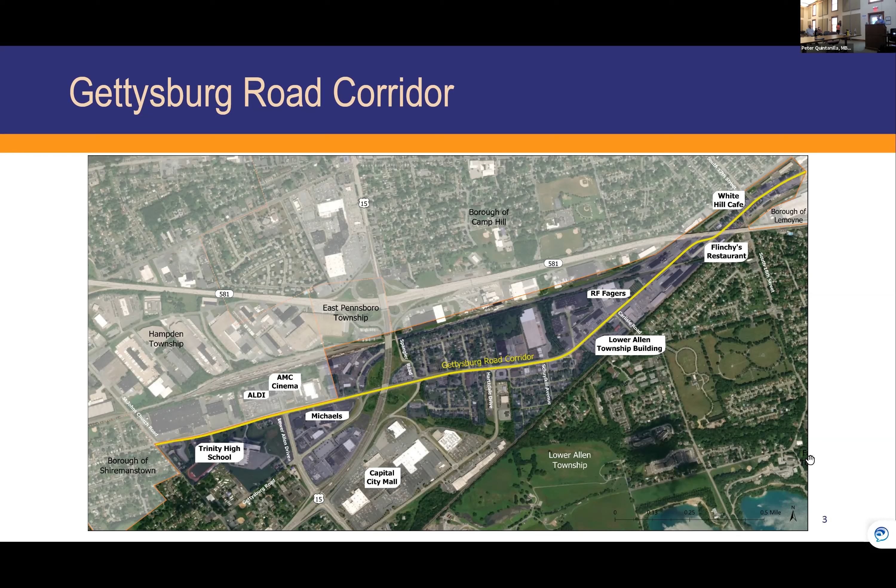This area is not just surrounded by or terminates with Shiremanstown and Borough of Lemoyne. It also touches upon Borough of Camp Hill, East Pennsboro Township, and Hampden Township. We've communicated with those municipalities and made them aware of this project. If there's any coordination opportunities, Shiremanstown Borough is definitely interested, possibly Lemoyne Borough, and Hampden Township sees some potential opportunities. So we're also trying to think about the bigger picture with this project.

So again, that corridor is about 2.5 miles. It is a state-owned roadway, so PennDOT has been involved from District 8. Michelle Tarquino, the district planner, is probably going to participate tomorrow since she's signed up, so we'll have their direct input and involvement.

Starting with Simpson Ferry Road on the west - those are the actual road names you might be more familiar with. But for this study, we're calling it the Gettysburg Road corridor. Simpson Ferry, Gettysburg Road, State Road, and Hummel Avenue comprise the entire corridor length, and you can see the specific state routes identified by PennDOT.

So again, 2018 was the right date for the comp plan. It recognized an opportunity to support redevelopment along the corridor. Some of the objectives are to breathe new life into underutilized properties, unify land uses, and create a welcoming gateway into the township.

Multimodal transportation access is also something we're focused on with respect to the corridor - CAT, Capital Area Transit, serves this corridor. Through our work, we also recognize it's a heavily used bicycle route because it's a designated state bicycle route, which we'll show here.

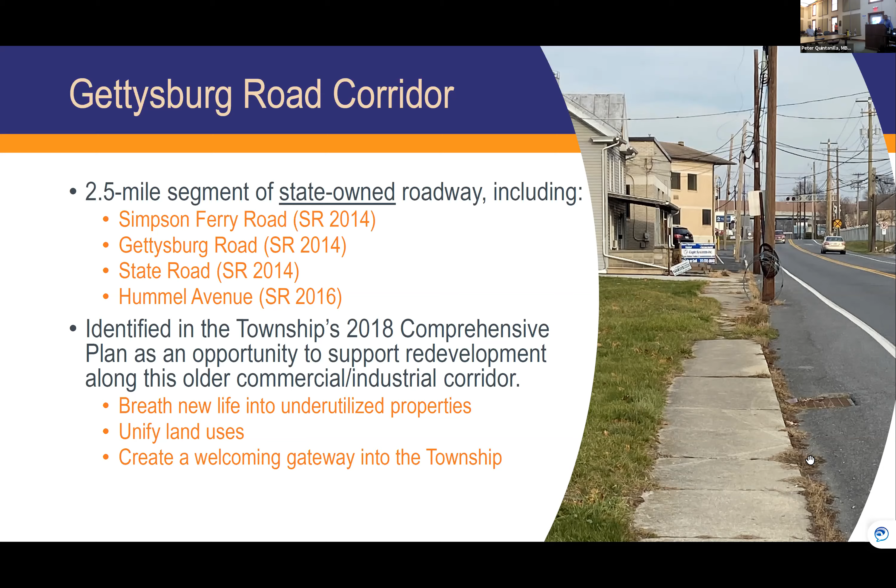The existing uses along the corridor - many of you know it quite well. There's a combination of active industrial uses; in fact, the short line railroad crosses here from the Norfolk Southern line to access some of the industrial properties still in use. There's also commercial, retail, and residential uses throughout the corridor.

Some of these uses and places are seeing opportunity for improvement, new sidewalks, et cetera. So that's some of the things we're going to talk about.

We also know this segment in the top picture is close to 17th Street, on the Lemoyne side. As you go under the 581 overpass, you'll approach the Carlisle Road intersection just outside the township building, and that's where the 2 lanes automatically turn into 4 lanes.

So we have this combination of traffic that's well metered, meaning consistent, slower speeds, but as soon as they get to the 4 lanes, it opens up and speed limits aren't abided by as they are on this end. So you have more traffic trying to flow faster, et cetera.

We also know, as seen in the bottom bullet point, that with the interchange relocation and reconstruction, traffic volumes have declined. In 2008, average daily traffic volumes were around 24,000, and by 2012 that dropped to 17,000. It's important to note that the Federal Highway Administration acknowledges that whenever traffic volumes drop below 20,000, that's a perfect opportunity to think about some type of complete streets or road diet to integrate other modal uses like pedestrian and bicycle into that network.

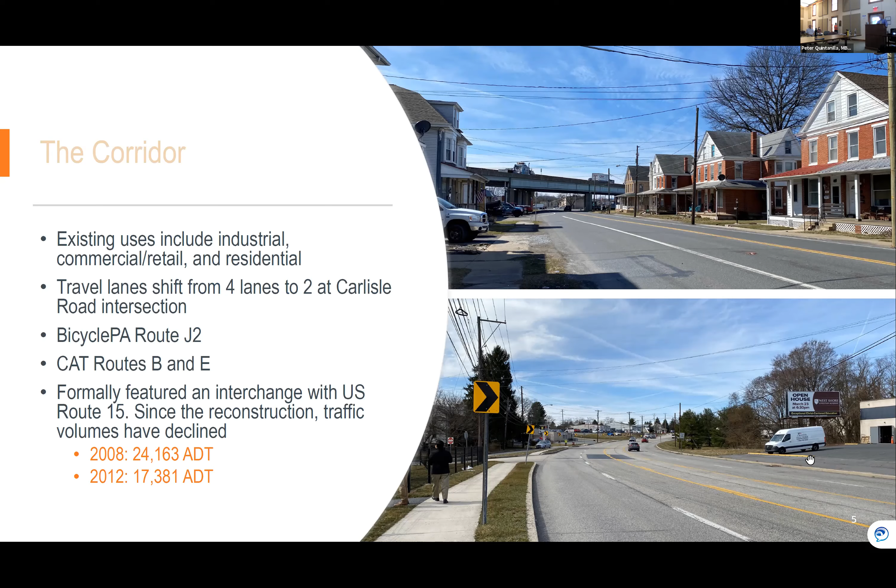Also, two CAT routes, B and E, also service the corridor as well.

So from a zoning standpoint, this is the industrial zone properties, and finally the orange is the general commercial zone. That's the current zoning. We know from township staff there are opportunities for improvement in how those zoning districts work and some of the regulations and standards that need to be looked at. That'll be helpful to think about through this process to get your ideas on future land use — what do you want to see for that corridor in the next 10, 20 years?

From a land use perspective, but also a transportation perspective, we know the township is investing in the former Bonton property, so there are good reinvestment opportunities nearby, but specifically along the corridor we want to start thinking about some of those opportunities as well.

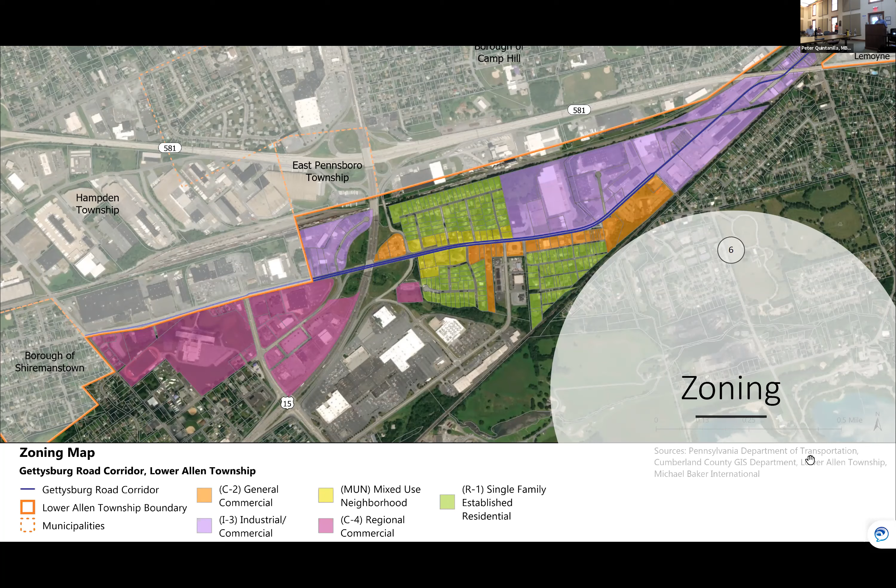In terms of bicycle connectivity and walkability, we mentioned the corridor is designated bicycle PA Route J2. The yellow areas on the screen are within the corridor — those are the actual sidewalks, showing where sidewalks exist. You can see there's a lot of disconnectivity within that sidewalk network, and very limited sidewalk connectivity along the corridor itself.

There's a little bit of sidewalk next to the town, just outside the township building. I think the township put some of that sidewalk network in to facilitate access from the township building and the park further down, and I think that was also to accommodate when Walmart went in. Is that right, Aaron? So there was some logic to trying to make those connections to some of those new shopping opportunities.

So that's what we want to think about too — multimodal connections. There's really no bike amenities outside of wide shoulders. At the 4-lane section, there are some pretty decent shoulder opportunities for bicycle lanes possibly. So we should think about where bicycle lanes could go, and also whether there's enough capacity in the roadway network, or over-capacity meaning extra lanes, and whether there's an opportunity for a dedicated lane for bicycle or pedestrian routes.

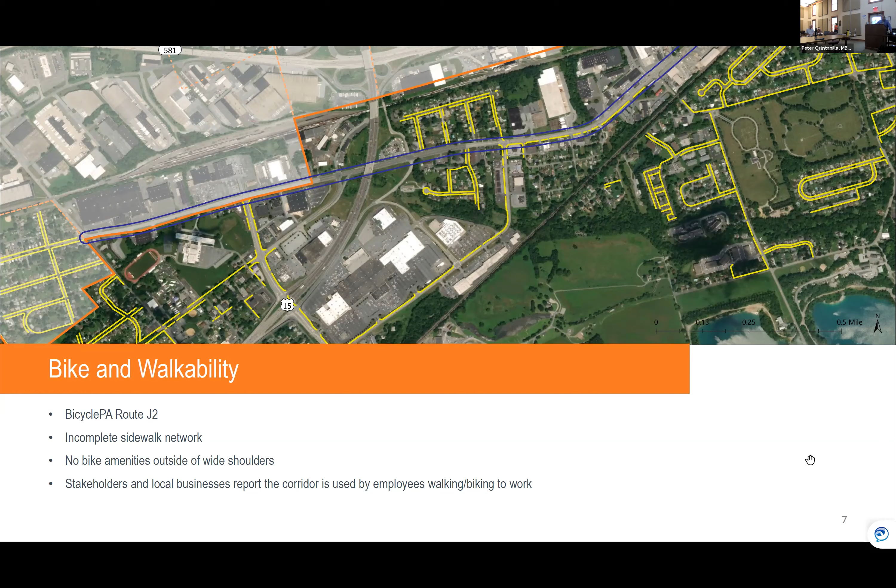I think here in the West Shore, there's a project where Market Street comes into Lemoyne. They're also considering moving forward with a dedicated lane for bicycle travel. That's a pretty tight bottleneck coming across the river bridge from Harrisburg into Lemoyne, through what they call the bottleneck. So if they can do it there, there might be precedents locally within PennDOT District 8 that we could apply to a possibility of looking at it in this corridor. So again, just throwing out ideas to get the juices flowing and get your feedback on what we're trying to achieve over the next day and a half.

So some of the safety issues that we've identified too in terms of crash statistics, in total, this data has been evaluated from the period of 2015 through 2019. This is after the interchange has been relocated to the Lower Allen Drive interchange. There's a total of 117 crashes, 1 fatal crash, 3 suspected serious crashes, and 4 pedestrian crashes. So there are conflicts.

This data for this type of state road with volume is typical, so it's not out of the ordinary. But anytime you have a fatal or any type of pedestrian involved crashes, we know there's a safety issue that we need to be concerned about. Where you see the red circles, or what we call the heat areas, the hot areas.

Yeah, so 2015 - if you remember the previous slide, I think it was around 2010, 2011 when the interchange was relocated. The previous slide about traffic volumes had data points of 2008 and 2012, and we saw a decrease that was directly attributed to the interchange being relocated. So what we're showing here is definitely after the interchange was relocated.

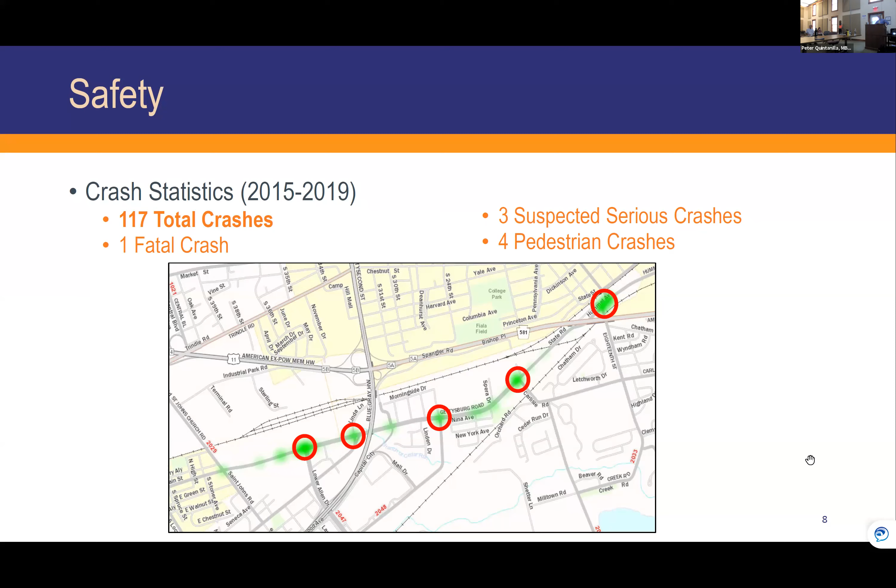So you can see where the main issues are, as you would think, at the intersection points. If you go back to the land use, at Hartsdale we have residential areas too, so thinking about pedestrian movements, if people need to access those. We have the background data on all of this, but just wanted to give you a summary of what's happening - that's what we wanted to present.

So we also had one-on-one interviews with property and business owners along the corridor. We conducted those interviews back in the April timeframe, I think, Aaron. I'm losing track of time here. And then we just recently had a public survey that I believe is still out through this urban design workshop period, but already we have 670 responses. That number actually rivals the amount of responses we got for the whole township's comprehensive plan, which I think was around 700, Aaron, at the time.

That's a really good response. I mean, that is a phenomenal response to think about, just for this segment of the township. So that's impressive, and it's given us some really good feedback too.

And again, where we're at today, this is all part of the public input process to help inform what you, as residents and constituents, want to see this corridor be in the future. Let's just say a 10 or 20 year horizon, because some of the projects might be more capital intensive, et cetera, to make those changes and transformations. Plus if there's any additional land use changes, that probably would take some time too. But again, what we're trying to think about is how the township, how the corridor looks today, and what the community would like to see the corridor look like and operate in the future.

So I just wanted to share some of the survey findings. Of those 670 responses, 72% are township residents, which is great. It tells us that these responses are largely coming from residents, but it's also important that the balance is telling us that they work in the corridor. So you've got people that not just live here, they actually use and navigate the corridor.

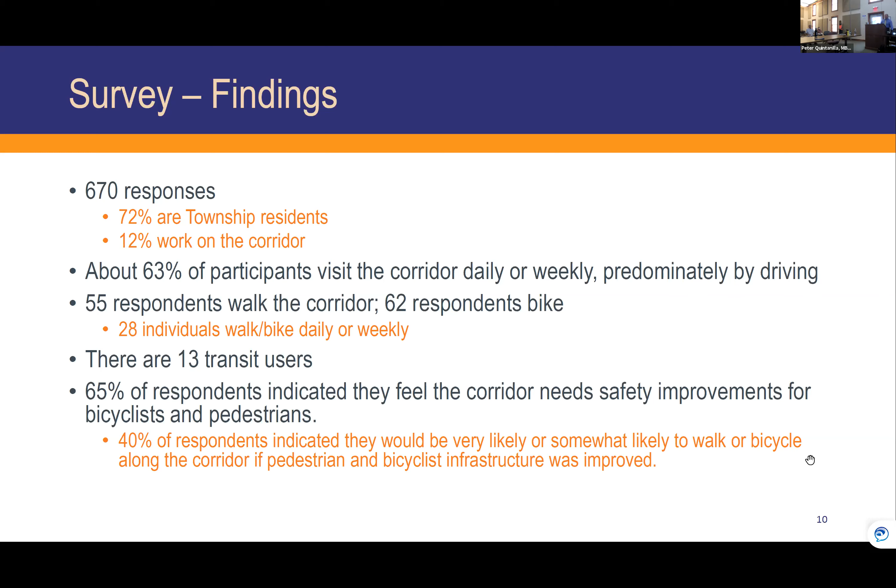Those improvements focused on bicycle and pedestrian safety. And if those improvements would be made, there's an indication respondents said they would be very likely or somewhat likely to walk or bike the corridor in the future. So think about the concerns regarding the current corridor state of high traffic volumes, speed, and safety issues that could be improved upon.

Generally, participants support aesthetic improvements, the overall appearance, new uses to include restaurants, parks and recreation, retail included, improvements to include sidewalks, crosswalks, bike lanes, and lighting. What participants in general do not support is new industrial, office, or healthcare uses. Also, they don't support new residential uses.

Yeah, John, I think you're talking about healthcare. Is that the one? Or I just thought, if you don't support residential, industrial, commercial, what uses do you support?

That'll be helpful to start when we begin envisioning the corridor. It's our response to, okay, let's think about this in a bigger picture. New residential uses, removing traffic lanes or blinking lights. I think what we're getting at is that they possibly see the corridor as being developed today, that the development is contributing to what we see in terms of aesthetics and to the safety issues.

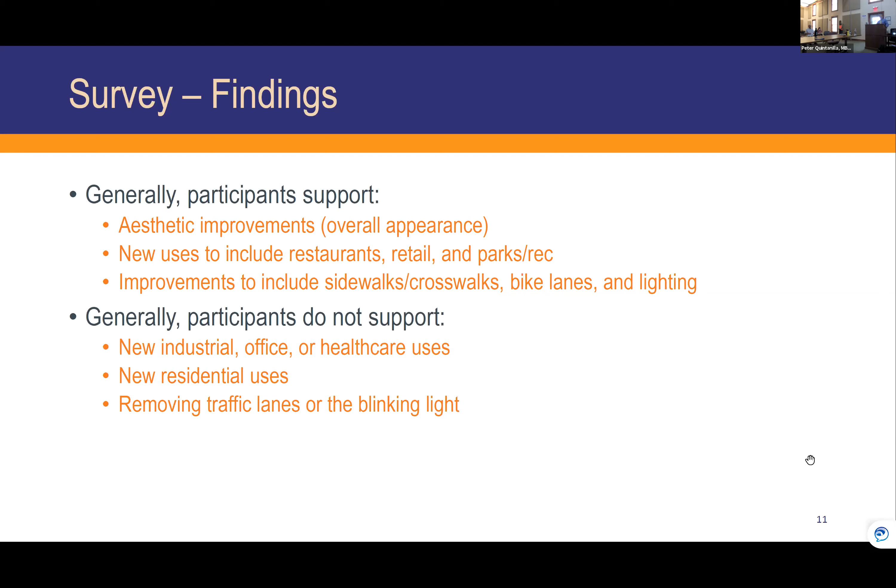There's probably a play there, in terms of if you have more development coming in, it might maybe potentially exacerbate any issues that are currently there. So again, how you interpret that information is obviously key. But that's why we wanted to do these urban design workshops, to start to have more groupthink and also physical drawing that Peter and Kirsten will start to do a little bit this afternoon, but also especially tomorrow.

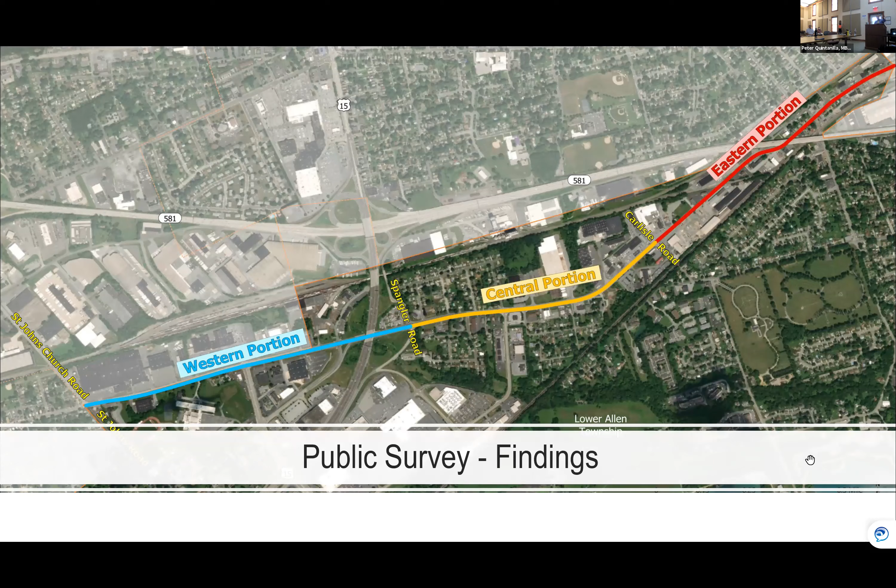So the next couple of slides get a little bit more into the details of the survey. We tried to help the survey respondents envision the corridor in sections: the western portion, central portion, and eastern portion. I think you can see how we segmented those out, and that's how the responses came back in. I'll just walk through these in a more expedient fashion.

Very interested or somewhat interested respondents in terms of restaurants, retail, parks and rec, future service businesses are generally supported. So think about any shops, offices, etc., that might be more business service related, shopping related, might be supported, restaurant related. You can see the eastern portion of the corridor had a lower level of consensus. Think about the corridor from left to right, going from Shiremanstown to Lemoyne, traveling through the township as you read those responses: western, central, and eastern.

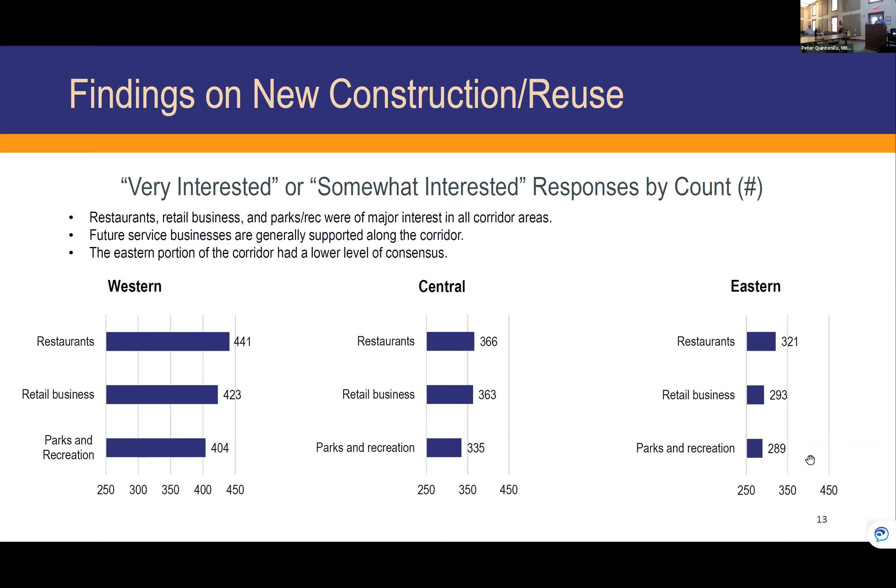Transportation improvements that would be helpful, very helpful or somewhat helpful. So these discuss street lighting, sidewalks and crosswalks, lighting under the bridge itself, bike lane there in the central, eastern...

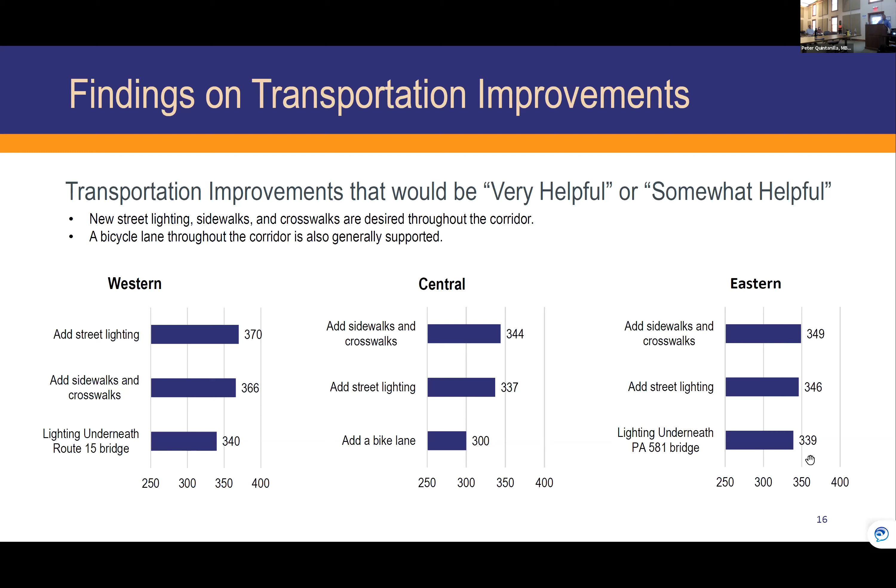Also on that side too is the 581 bridge. So again, those areas of trying to think about navigating that at night, you think about some of your users of bicycles, but they're going to different shifts during the wintertime when it's darker longer. They might have to get to work and they just really don't have good visibility along that corridor, or if somebody's walking that corridor, they don't have good visibility, and a perception of maybe safety might be driving some of the lighting issues there too.

Transportation improvements considered not helpful. Just in summary, hesitation to reduce the number of travel lanes. I think there's not a real consensus on how reducing the 4-lane section down to maybe 3 lanes, whatever that number might be, from a road diet. I think we need to talk through that.

I think what we're hopeful is through this process, we can start to get a visual perspective. And whatever we come out of this with in terms of transportation recommendations, we have traffic engineers that work with District 8 on a regular basis, PennDOT District 8. We always take these ideas back and test them with our engineers to make sure there's some feasibility in terms of meeting design standards, that this is feasible from that design perspective.

And obviously cost is another perspective. We really try to ground truth these ideas and get experts in from a bicycle perspective, if we have bicycle improvements, to make sure that what we're recommending on the back end of this project actually has some level of feasibility that the township should be confident to start to move forward.

There is a response to maintain the existing blinking emergency traffic signal. They don't want it removed out here at the township building. But even trying to ingress and exit is a little bit of a challenge because of the 4 lanes. I experienced that, especially because I live in South Middleton Township. I want to turn left, I want to get home that way. So that's a little bit challenging.

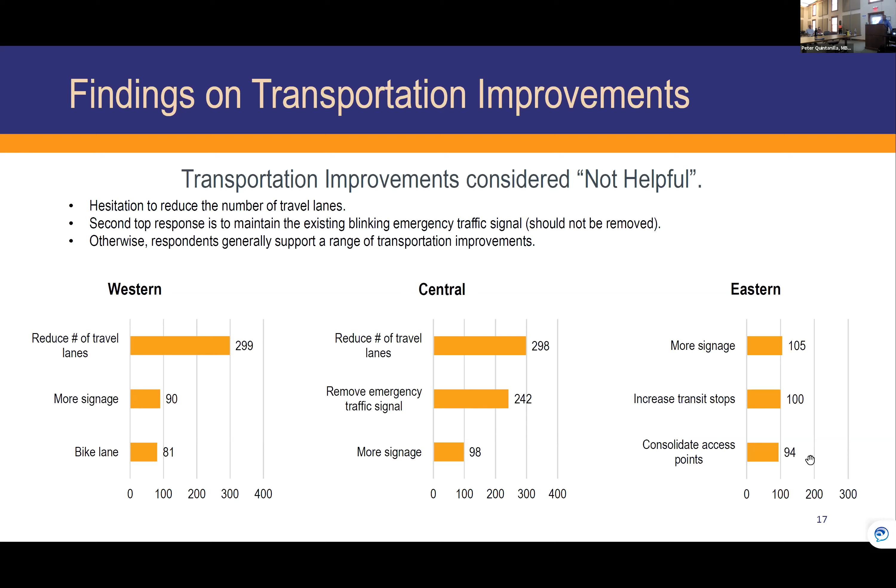So just to wrap up here, I'm going to turn it to Peter and Kirsten, because Peter's going to be out going live from the field, much to Aaron's concern that he might be a safety hazard, but we trust he'll be fine.

And then we regularly hold meetings with township staff on a monthly basis. And then we'll be having more public meetings to unveil the final draft product with the Planning Commission and the Board of Commissioners here, probably in the July, August timeframe scheduled.

So the public will have a chance to see the whole document. It'll be out on the website, and kind of get all the inputs brought into it. So one last thing, just to kind of...

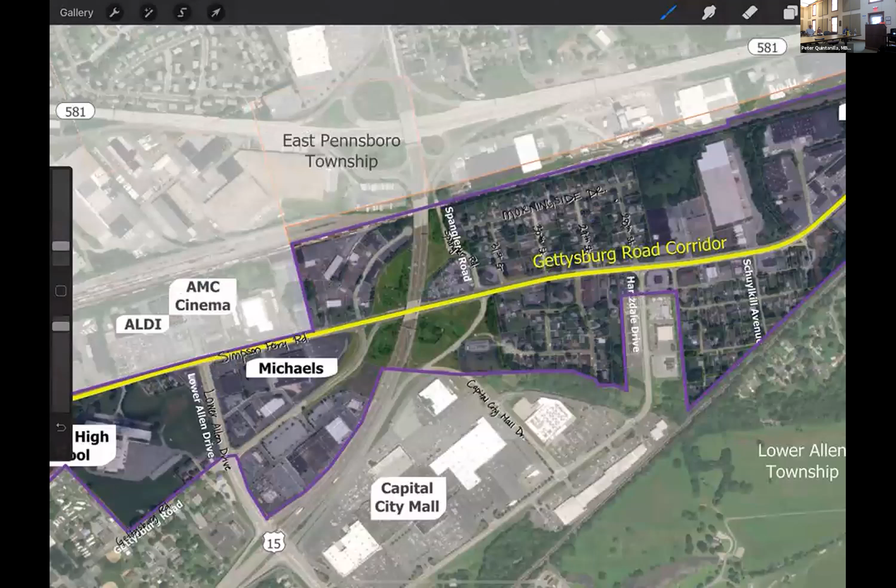So again, Peter was down here by the overpass, and we looked around at what those conditions are like underneath. Obviously you can see a large area like this looking at the map, but we're not looking at it in an enormous amount of detail, which is why we wanted to dive in and look in 3D. So we looked at some photos here, for example that underpass. We were thinking about the lighting, the connectivity, the sidewalk and the bike lane, and the opportunities with the green space on the side and the width of the road.

We want to open it up again to those in the room and those on Zoom, please feel free to be conversational, speak up and share your ideas. What did you guys think looking at this space? Is this a space that you would feel comfortable walking in?

I had not thought about the uplighting, in fact how dark that space actually is. So I would think uplighting of the overpass seems like a really good idea, to make that more lighting for bicycle or walk.

It's interesting, on the other side of the street you have a bicyclist heading west along the shoulder. Over on the other side of the street, if you're traveling east to west to get through that overpass, it's really tricky because there's kind of an entrance ramp, which is always difficult if you're on a bike or walking — a tough thing to navigate. So it would kind of make sense to see a bicyclist on the other side of the street, although that's not the ideal side.

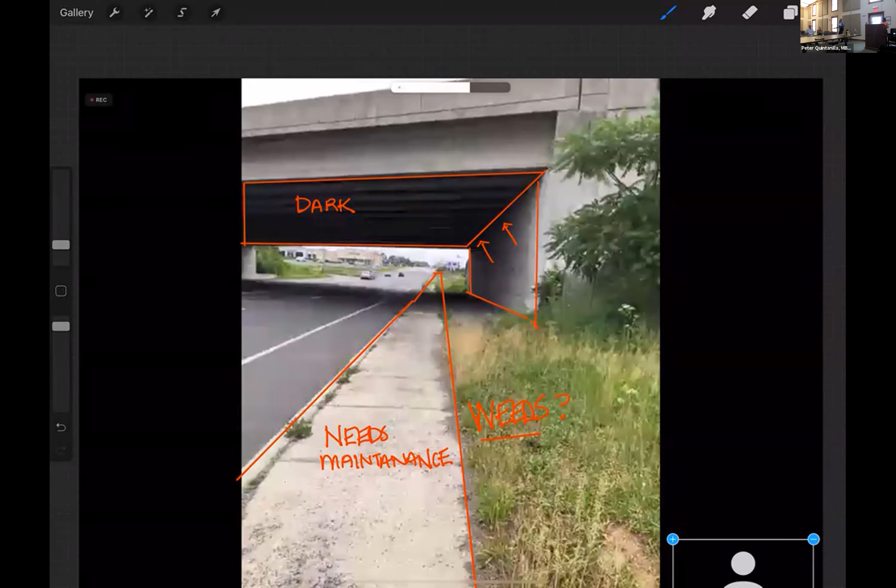Let's say that there was more lighting. Does the sidewalk itself feel safe next to the volume and the speed of the traffic next to it, on the other side? Despite the fact that there's no sidewalk on the other side? Yes.

So that tells you something. That tells you that people would prefer to be further away from the cars, even if there's not a formal sidewalk. If they can walk further away from the vehicles, that's probably why they're walking over there.

Residential areas on this side of Route 15—I more often see people walking Hartzdale Drive to get to Walmart, Capital City Mall, and other destinations than I see walking. I don't see a lot of people walking along Gettysburg, Simpson Ferry.

So they're taking the Hartzdale Drive route to get to the mall and those amenities versus here, because we have Spring Lake on both sides of the railroad, and Linden Gardens and Preston Manor, the developments between here and Route 15. They tend to gravitate up to Hartzdale Drive and follow it, from what I've observed, rather than going straight through into Hampden Township near Trinity High School. There are some destinations there, but I think most are more along Hartzdale.

So we have to think about that end of the corridor. If you would make land use improvements, then what would be the gravitational pull for? I see more bicycles here than I see on Hartzdale, and we just physically saw that today, right?

Do we think there would be a use for bicycles on both sides of the road, but with directions of bicycles that go with the flow of traffic? So bicycles going one direction on one side of the road and the other direction on the other side, or having a separated, more protected multi-use path?

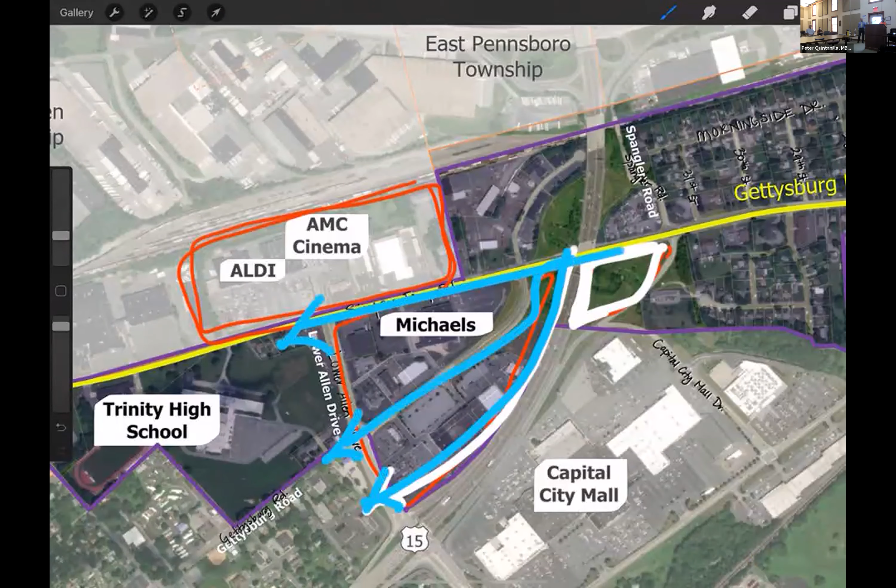So, we do just know that—go ahead, Peter. No, I was just gonna say I'm at the next place, so we could jump on whenever you guys are ready, but go ahead.

Yeah, we're just getting ready for you, Peter. We're just wrapping up here, looking at this—again, we're going to get into more detail starting to design these areas tomorrow, but we want to have this ground reference in our minds so we can jump right into it in the morning.

Hi, this is Commissioner Kutz, if I may make a comment. Yes, go ahead, Commissioner. So I think, in my mind, we have the big development authority project coming up that we hope will attract a lot of people from the mall, maybe foot traffic with the restaurants and whatnot, from the high school and the surrounding residential.

So you had asked what we think we'd like to see there. I think it's exactly that: pedestrian access and sidewalks so that we can have a commercial center for the township. We even have our police department designated as a separate zone—the Hartzdale Capital City Mall corridor—because it is the central commercial corridor of the township.

So I think part of what can help us make that area more attractive and improve people going to those businesses is improving the walkability of it, so that someone could park at Michael's and walk across to the specialty grocer and other tenants there, but could also walk down to Nikolai's or Pizza Grill for lunch, or walk across the mall. I would love for just the walkability aspect of it. Looking at the pictures Peter had taken, I don't think that area is utilized much by pedestrians right now, but I think it's because that sidewalk is not in the best shape and doesn't really go anywhere right now.

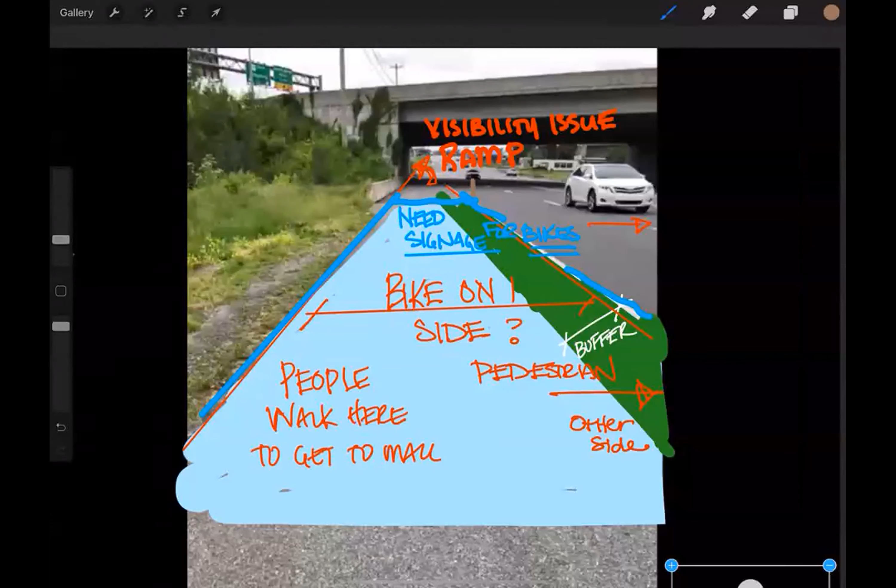And would poles like that be the separation that you're thinking about that would make you feel a little safer riding on a bike path there? Yeah, I think that's a great idea because it seems fairly simple and fairly reasonable financially. I like that - a bunch of poles really demarcating the area would be great.

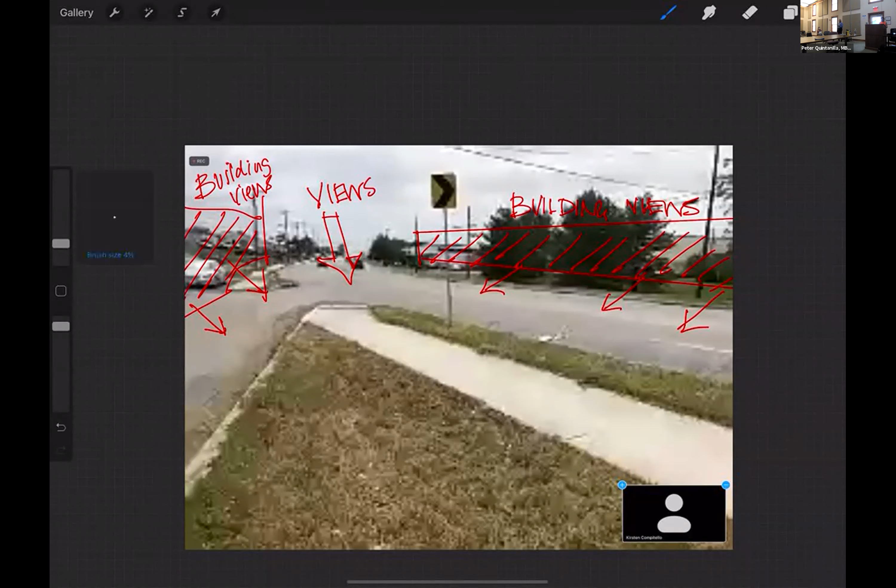I think right now that space actually accommodates both commercial and industrial, and some of those houses he was pointing out are actually business uses already. I was anticipating what I thought Eric might say.

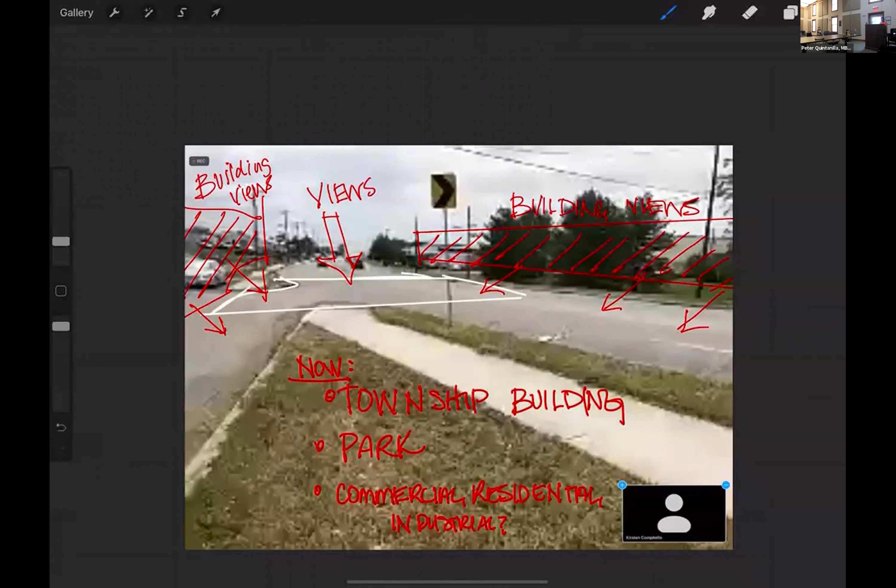Further west or south on the street, we have a mixed use area on the generally north side of the road that really isn't conducive to mixed uses without combining lots. So that would be an opportunity between 31st Street and Hartzdale Drive in that area for mixed uses also. On the right side of the screen it's pretty much industrial, so there are large lots with large users. On the left side, where he was talking about the hair salon, there are a lot of small properties, so that has the ability and already is mixed uses.

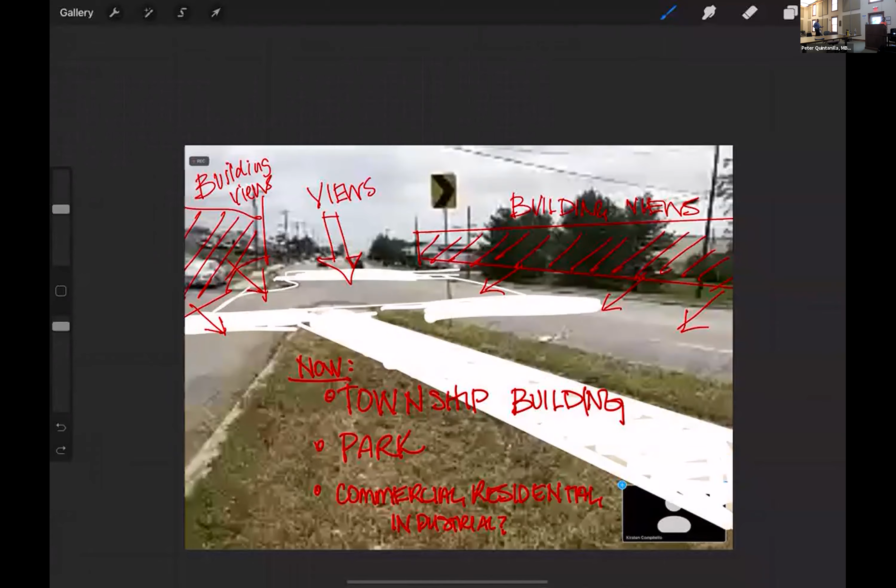The problem we're having is enticing people to do mixed use in the next blocks up toward the first site he stopped at, past Hartzdale Drive. There's some vacancy there right now. I don't know if you can go back to that overhead screen - it's down by, on this side of that park area, right where the arrow is pointing, to the left of that, up further down, yeah.

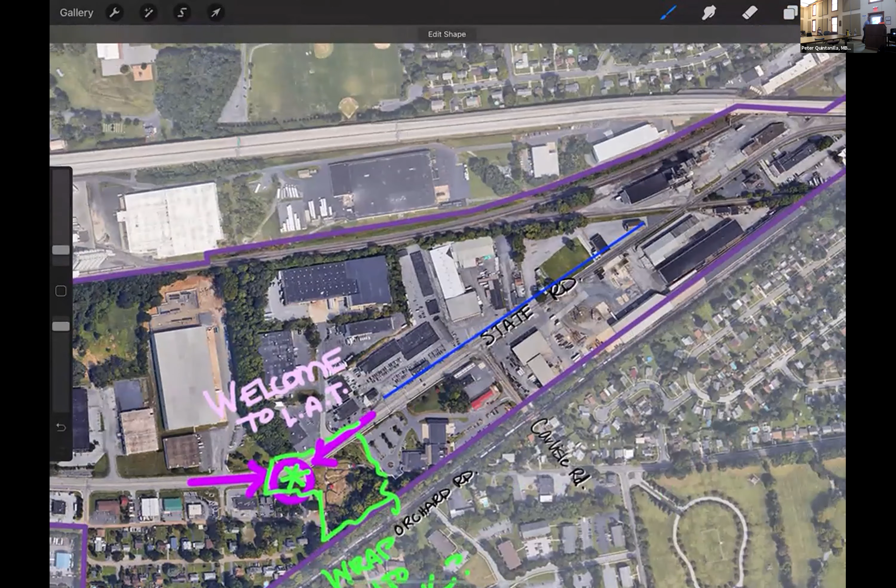We're looking east? Yeah, further east. See where Hartsdale comes? Yeah, so just go beyond that. Going west—there we go. Okay, yeah, so further, just a little bit west. Here's Hartsdale Drive there, and so it's this area.

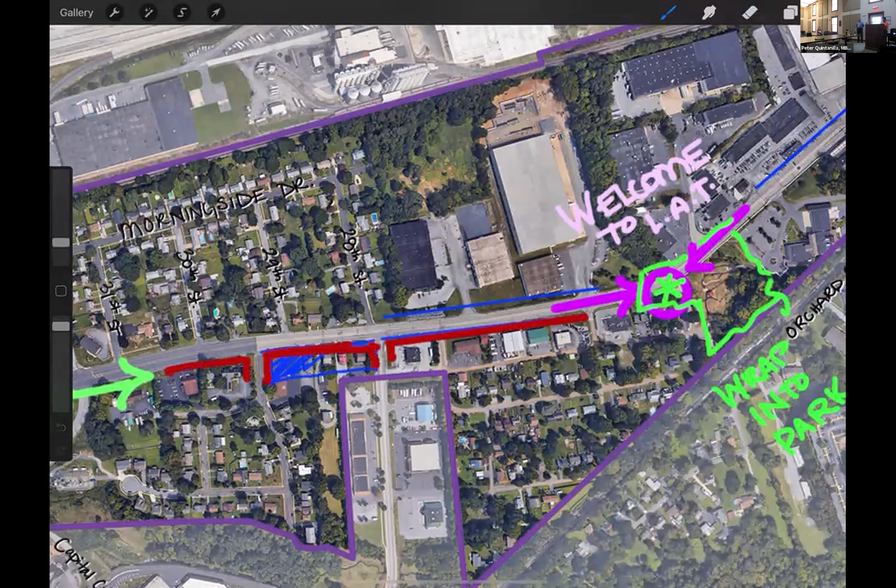Pretty much on the bottom of that corridor, right, you have mixed use development all the way up to Route 15. But it's the north side between Hartsdale Drive and Route 15 where we have residences. There are a few that are converted to commercial, but we have several blocks of single family homes that aren't as desirable as single family homes, but they're not easy to convert to business.

And I think it's interesting because of where you've made the pedestrian improvements with the sidewalk from this location at the township building, connecting with Hartsdale Drive. You can almost see that if you'd add more, if the land uses would change, you could get that pedestrian activity to congregate around potential new uses in those blocks. I think that's what we're kind of thinking about as a potential opportunity.

Do we see that more on the south side of the street or on both sides? Well, the south side already has a higher percentage of mixed uses. So what I was referring to was between Hartsdale Drive and Route 15 on the north side, where we don't have much mix till you get right near the old interchange. We'd like to see it on both sides. That's an opportunity—we have sidewalk on the south side, north side, don't believe so.

Can I just add a point about mixed use? There's something I remember from a workshop like this one many years ago. We had this lady, a newspaper writer from England, British, following us around to document what we do. And she said, 'My God, you urban designers are just like the cavemen—you go in the cave and draw the bison, hoping that once you come out, you'll kill it.' I think the same thing happens to planners—which my wife is a planner, so I'm not saying anything bad about planners, Aaron—but just because we automatically make something mixed use doesn't mean it will automatically become mixed use.

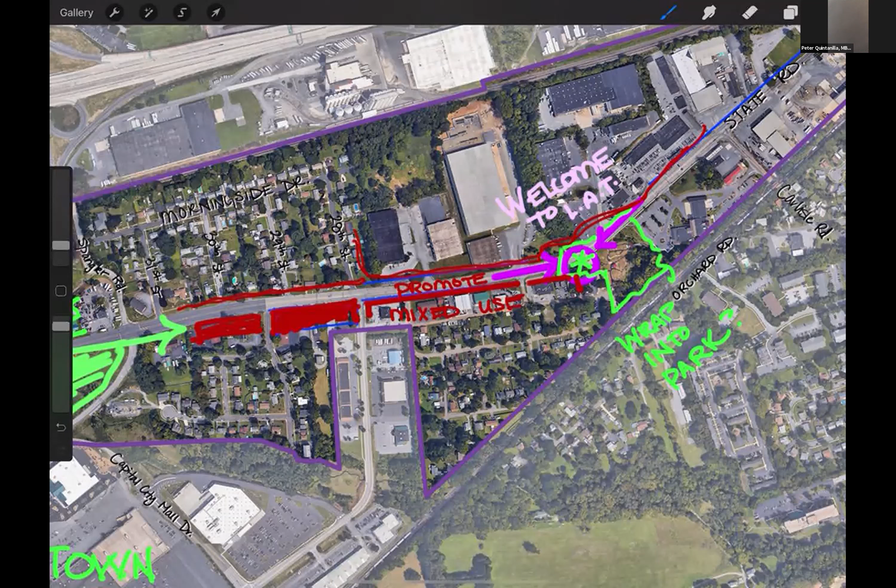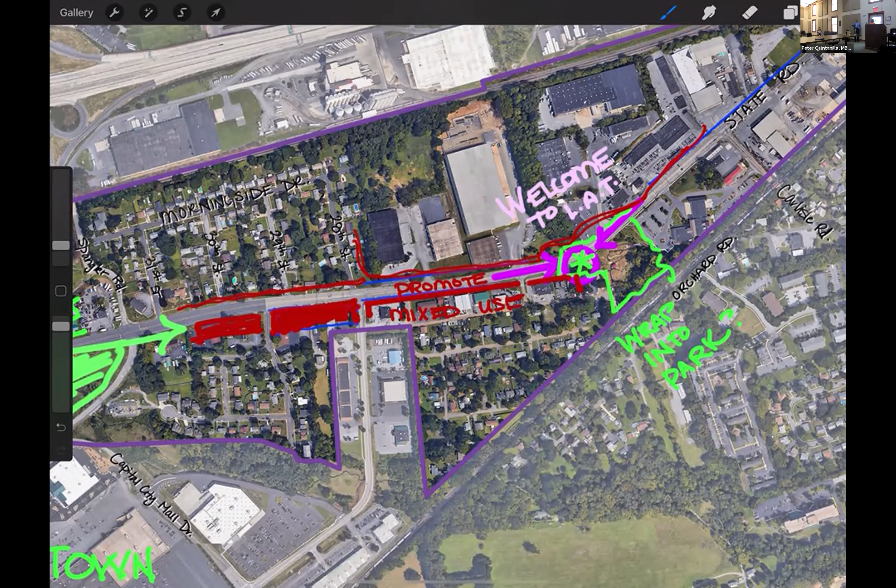Right, and so some of the things we'll need to be looking at, and asking you about, are: what is the built environment? What is the right scale? Can we pull some buildings closer to the street to make that space feel a little more comfortable for pedestrians and comfortable for people to want to come and treat it like a walkable, town center kind of environment? And where are the right places to get across the street?

Well, I think this project, if it comes to fruition, we need to look at more than just what the township can do. We also need to get the businesses on board. Some of these properties could make that corridor a lot more enticing if they just had a little maintenance and care. I know this is hard to do, but if we're going to be successful, it's something we at least have to attempt.

Yeah, property maintenance is a good point, especially older, tired businesses—if they're not having the revenue to have the funds to do it, that's what happens, and things start to go downhill, right, Dick?

Yeah, just to the point about the mixed use on the south side west of Hartsdale Drive, I think you have more successful uses, but there's still more vehicular access than pedestrian access. What you need to do is create that welcoming environment where pedestrians feel safe to come across from the neighborhood to the north—again, the connection points, the pedestrian connection points. I think that would help, but also completing the sidewalk on the north side would be beneficial to make those connections to safe crossing points across Gettysburg Pike.

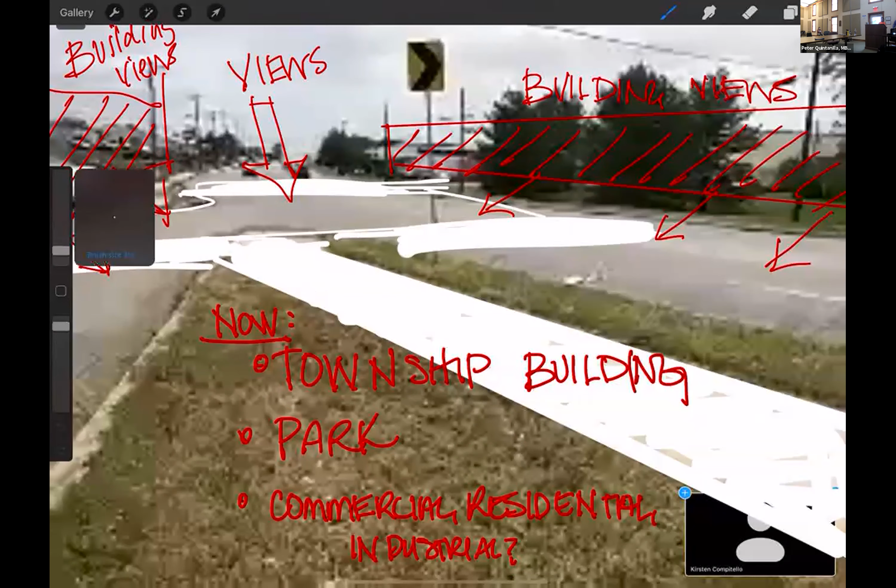Just for a point of data reference, the number of trips split between Simpson Ferry and Gettysburg Road, is that somewhat equal at this point? I'm assuming with the interchange redevelopment that there's more coming Gettysburg Pike. Yeah, the split really comes down between where Carlisle Road intersects with Gettysburg Road. So that's really start to see a difference in the volumes, because now since the interchange has changed, it's kind of a uniform trip count looking at that picture towards Shiremanstown. And I think you'll see also some change there at Hartsdale Drive.

So there's some of those key turnoff points where you could actually see some of the differences. And I think again with the redevelopment project at the Bonton, if some of those future uses are going to be attracting people from the surrounding neighborhoods, I think that's where the importance of the pedestrian and bicycle connections are going to be necessary.

We also heard in our previous stop a desire for street trees to give it more of that town character and town feel. Is that something we'd like to see continue down here? Does it make sense to continue that from the overpass area, from connections that get you to the school and to the Bonton site and mixed use and commercial uses, all the way down to the township building, to make that a continuous corridor with continuous identity and have street trees? Is that the kind of identity and environment that would be suitable to what we're looking for?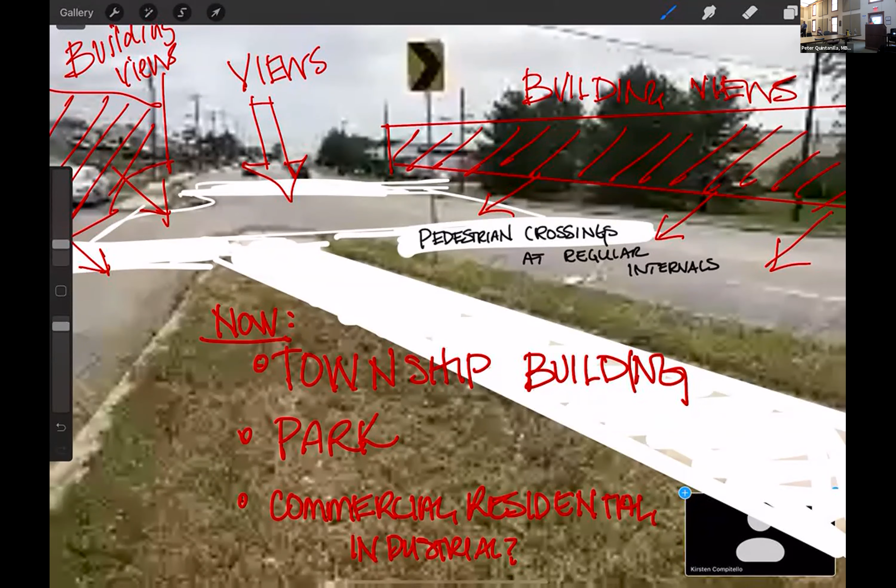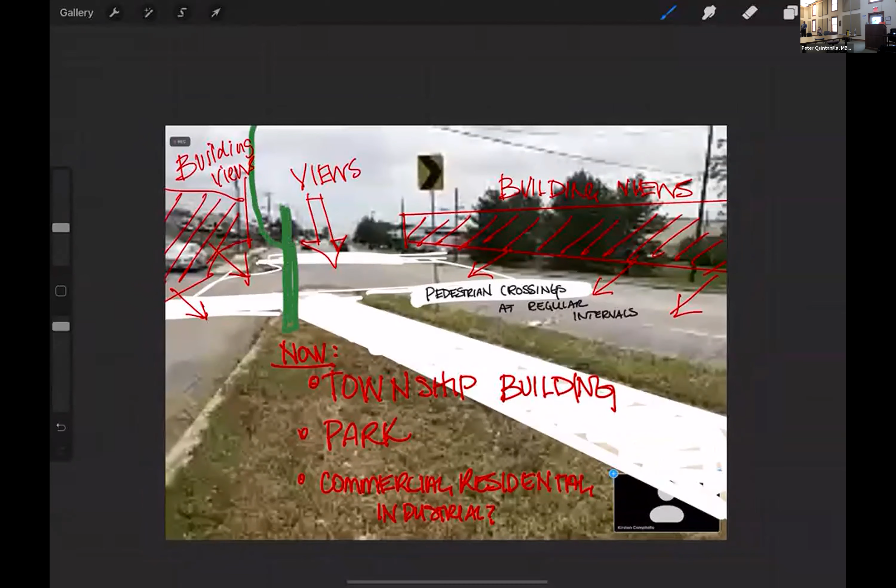Trees are a little bit problematic there because we do have the overhead wires, and we've seen some of the street trees get really butchered when they have to come through and do maintenance. I don't know if you've seen up here further on Carlisle Road where they're like half trees. I don't want to plant them knowing that they're going to be sacrificed later on. So you'd have to take precautions as to what kind of plantings you're putting in place. Maybe more shrubbery than trees, but I like the idea of green space being used as a separation for sidewalk or bicycle as opposed to bollards or something like that.

Jim Kaiser, the township can set up their own ordinances on how the trees can be pruned, and set that for any pruning that's needed for any kind of electrical work. That's the problem - if there's no ordinances, then anyone that works for electric companies will cut the trees any way they can to get them out of the way.

And I have a more radical view. People shouldn't plant large trees under power lines, and they should be butchered so people stop doing it. But that's just me. If you look at our trees here at the township building, they're shrub trees - red buds, hawthorns, dogwoods. They're appropriate species for the space, and that's what we need to encourage.

We need, if we're going to put trees in, to put trees that as they mature are not going to create problems with the buckling of sidewalks, curbs and streets. Correct. Those are all excellent points. I'm not a landscape guy by any means, and I definitely don't have a green thumb, but there are some tree species that don't grow very much. You could also, depending on how you maintain or plant a tree, plant it within a box that would constrain the general shape. The root system tells you it's supposed to be the same size as the tree up top, so depending on how you box in the root system, the tree may or may not grow until you're able to keep it much tighter. But that's something we need a landscape person to inform us better on.

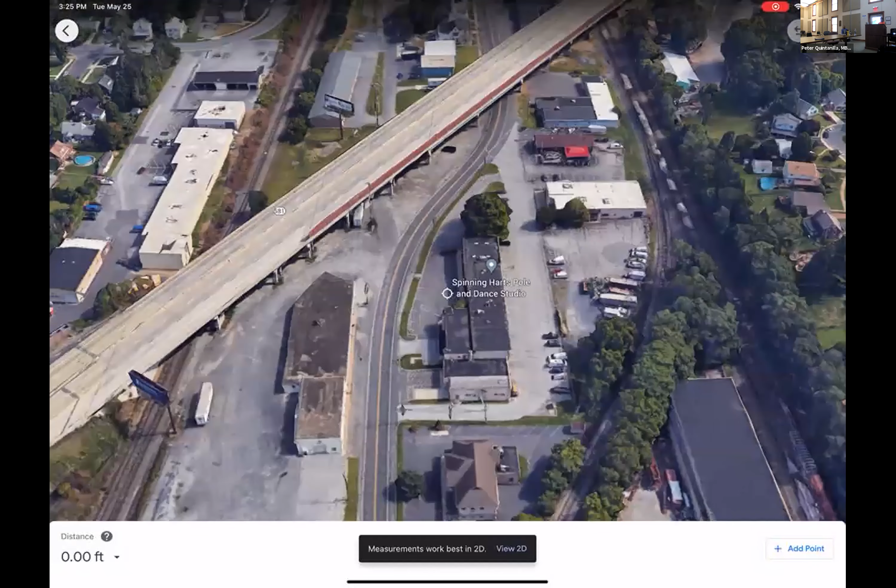Going over towards the eastern edge of the site, you've got another underpass, another area where the urban environment is a little different. You don't have as much solid wall, but it crosses at a very oblique angle, and there's a lot of space. We've got a couple of roads that pass under there, and just a lot of space around this intersection. Maybe just a quick history lesson here, because Simpson Ferry Road, this used to be the alignment that went straight underneath what is now the old...

Is that correct? It went behind, as I understood from the conversation. Well, actually, Hummel Avenue went straight behind the old municipal building and dead-ended at that rail spur. And there's a history of an altercation between trolley workers and railroad workers at that location.

And then, State Road coming out of Lemoyne and Camp Hill, your 7th Street Bridge, goes parallel to the railroad track, and that new segment from Hummel was probably built when 581, originally 767, was built. That curve at the old municipal building - there was a street coming straight out of Hummel and a street parallel to the railroad, and they didn't meet.

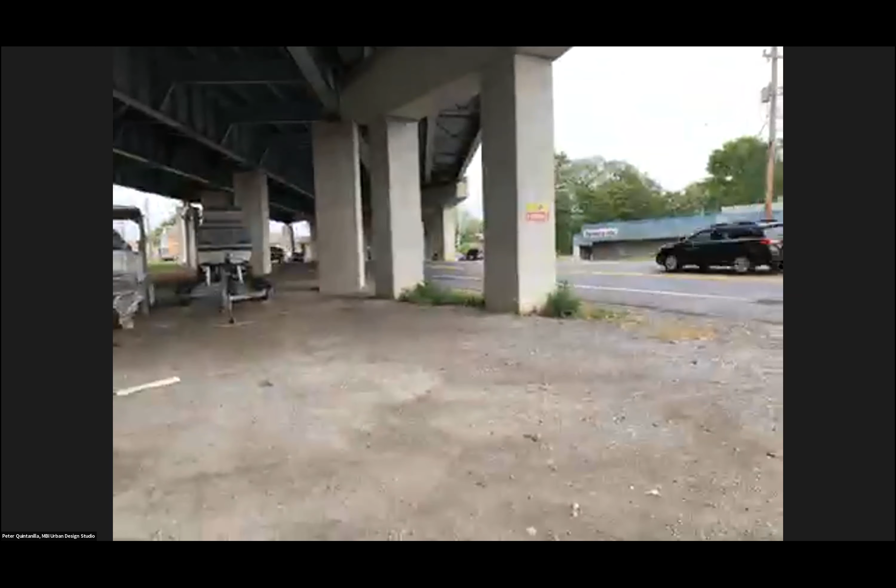That's good, that's excellent, and that's a very good point. Then there's the other part here - this is actually the parking for that restaurant across the street, but imagine trying to cross this after you've had a couple of beers - that could be interesting. Plus, these columns actually block the view of cars coming from the left.

So again, this is one of those areas that becomes no man's land that could potentially be something much bigger than what it is here. Considering this is only a 2-lane road, meaning it's not high capacity, you could potentially even have on-street parking along the road here, and have the rest become some other use besides parking, or have a really nice liner so it encloses the space if you still want the storage you have back here.

So two things I would add - first, I would love to see some sort of conversation with business owners at Flinchie's to see what they think, say, if we want to put a little median in here, how would that affect your business and how people use it? I can say when I go to Flinchie's, you're just kind of driving across the middle of it and hoping to pick the right spot. So I think that's definitely somewhere to look at.

My other question would be, if you were to put some sort of basketball court or something underneath the overpass there, what would be involved with that process, number one? And number two, when you do things like that under an overpass, does that increase any level of potential criminal activity, or is it just another place police have to patrol? Right now it's kind of no man's land, but do we create an opportunity for a dark space that might invite activities requiring police monitoring if we use the area underneath for that purpose?

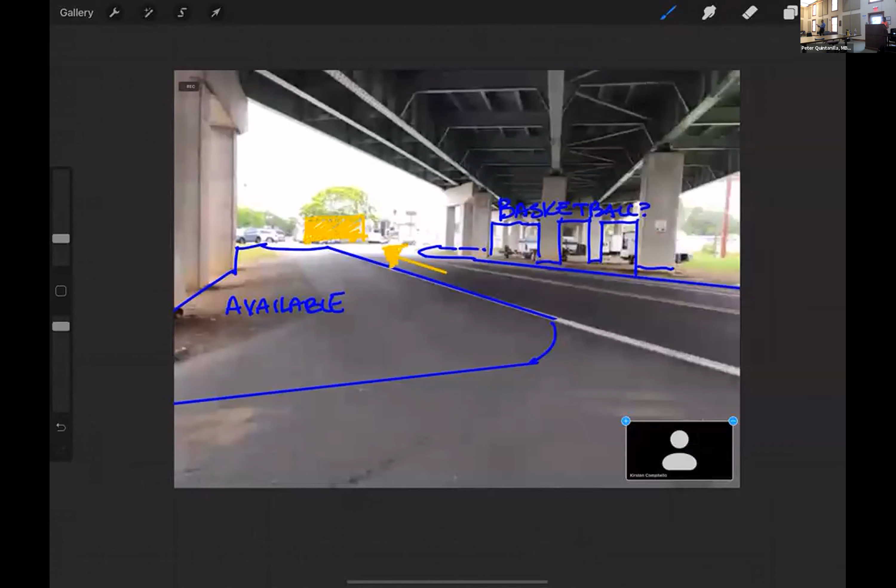I don't think so, that's a PennDOT question. Yeah, they have to be able to get there for maintenance. So you couldn't fence it off or do something like that. Right, but if it would be a park-owned facility by the township, could there be, it'd be something we could possibly explore, I guess, as far as what's not precluded from that air easement or ground lease type of arrangement. Definitely have the lighting issue, and pigeons, because they roost on the decking, and you have to have their permission to put anything on it.

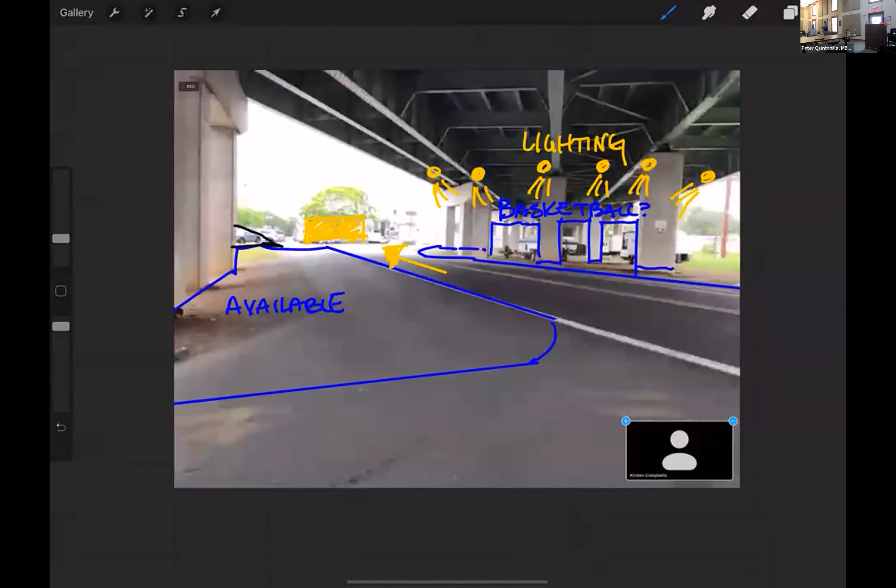So I think, Commissioner, that's a great question. Hopefully that helps answer your question in part there with that. Yeah, so essentially we can do something, we just have to be mindful of PennDOT having access to the aerial easement.

Sorry, I'm just rejoining here, but in Pittsburgh, actually, we do have several parks that are immediately under the 376, which is a PennDOT road. And yes, as long as it's an area, you could do a basketball court, all you need is just the asphalt. And of course, where the poles are going to be, the hoops are going to be on both sides, so that does not preclude anybody from actually going underneath. Plus, you're not going to put a lot of greenery because it will die, it doesn't get a lot of water. So those are all the different things we have to maintain in the design. But yes, you could, in theory, actually do a really nice park.

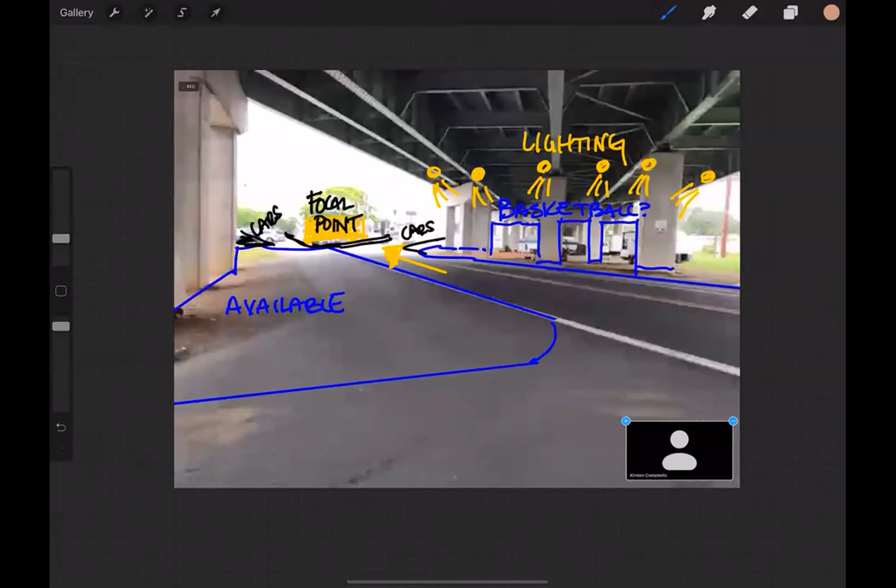And to answer your question, sir, the idea would be to actually put lighting, because once you put light hanging from the top down to the bottom, which is something that PennDOT does a lot in most of their bridges, then it will make it safer for anybody, and it will be safer than the condition you have now.

That's excellent, Peter, thank you for that. That is very encouraging. This might be a conversation to hash out later if we decide to do a park here. But you could do outdoor bolted-down ping pong, or I've seen cornhole that's bolted into the ground. We have a lot of basketball and tennis courts in the township, but something unique — ping pong came to mind, and cornhole came to mind. I don't know, maybe kind of a lawn game type thing, but obviously that's something to hash out later as far as the details. I just want to throw that out there.

That's an excellent point, because the other thing we tend to forget whenever we say park is we automatically think of basketball, baseball, football, soccer. But the reality is you also have other types of people who would like to go to a park and have a more passive type of gaming, but also they have their children. So you could also do a children's park underneath the highway that makes it very safe, but also protected from the road or the rain.

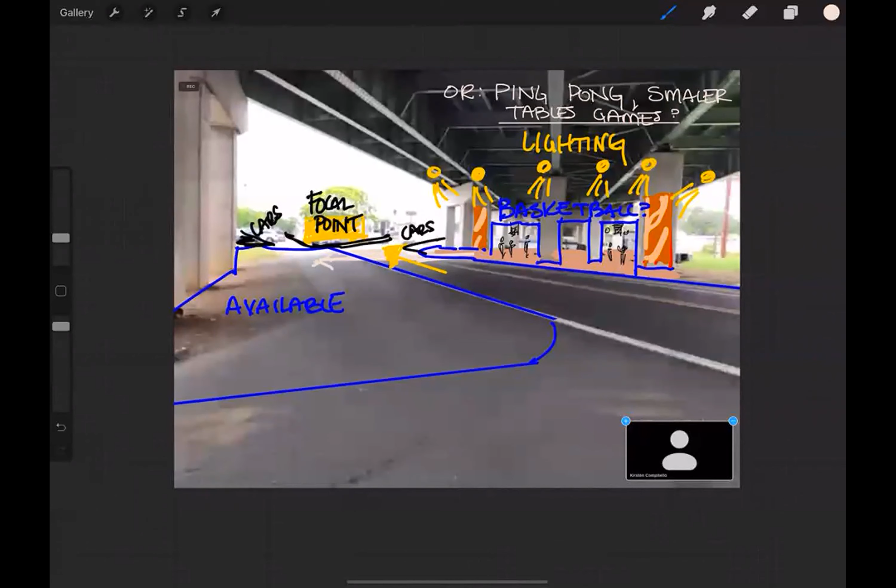And chess, for that matter — you always see in movies people playing chess at parks, so that could be an idea as well. I'm just trying to think outside the box a little bit. I know there's a lot of space down there. Some of the space near the detailing shop is a runoff collection area, so I don't know how much of that is really in play, but certainly what you referred to as storage, where there's just extra parking across from Flinchie's, would certainly be a good candidate for it. I'm sure it would attract people to go to the park and then go to the restaurant, so that would certainly bring some business in for the township.

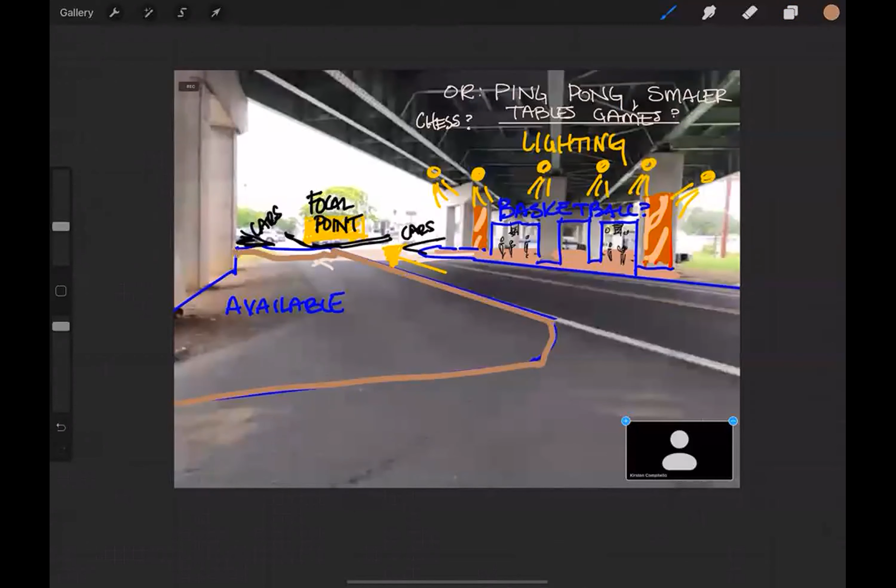The growing sport in the area right now is pickleball. I don't know that Lower Allen has any pickleball courts that I'm aware of, but maybe we do. Yeah, Dick, we just did them this year, actually just about a month ago. I think we finished 4 of them at Wasp Park. Oh, great. But we've talked about putting more in, depending on how those get used. In fact, there was a question in one of our residential Facebook groups today about pickleball, so that could be another place for it.

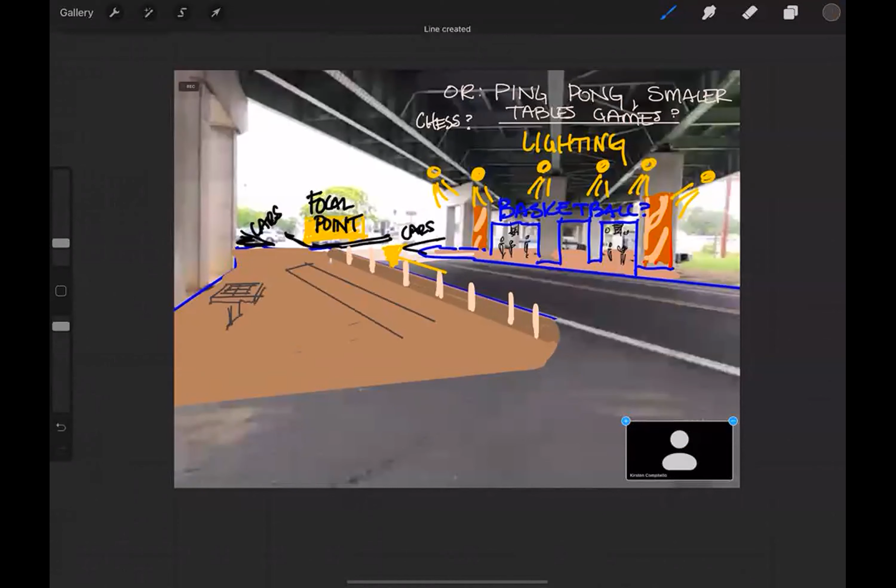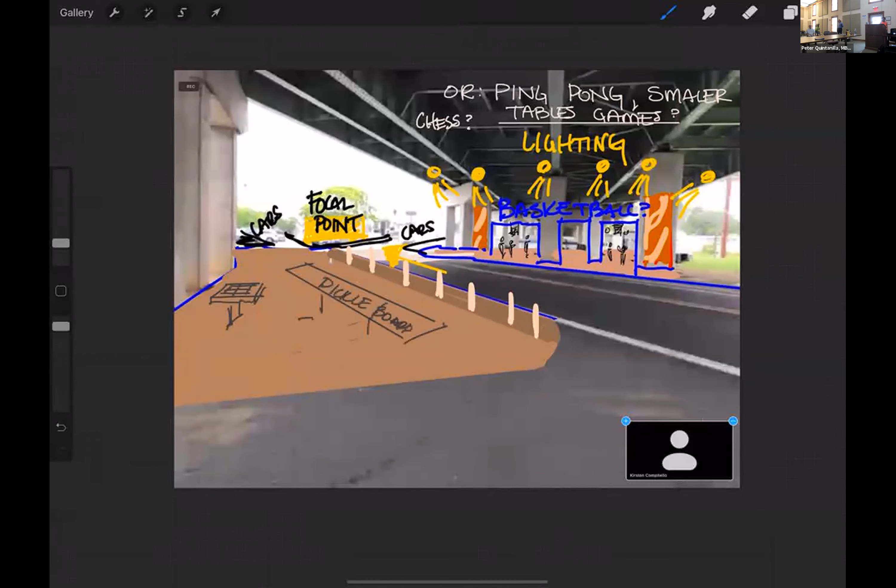Well, I'm going to confess, I don't know what a pickleball court looks like. I'll just label it 'pickle board' and we'll look into that. And possibly Flinchie's might be interested too, there's a lot of restaurants and places like Flinchie's, sports clubs and bars that have bocce ball or cornhole tournaments and things like that they might be able to take advantage of. I think that would be perfect.

It would be interesting, maybe we could try to engage Flinchie's like we did with the restaurant owner on 6th Street, just to pop in tomorrow if we had time, if the manager's there, around lunchtime, and just see if they'd have a chance to stop in and chat about this and get some ideas.

Here's another opportunity or question: what about spaces for food trucks? What if we put 3 or 4 spaces there ready for food trucks to line up, so they can reserve those spaces or come by? So if we could have a park area and also a couple areas for food trucks, I think that could attract some people.

The only concern I would have is probably a shortage of parking. So I think that's the one thing to be mindful of if we do too much with that space, I don't know how much capacity that area has to add additional spaces.

You're completely correct about the shortage of parking, but I think the minute we have a problem with shortage of parking means we've been very successful at creating a place that's very inviting and people are coming. At that point, all those restaurants and businesses start picking up the amount of people that come, and things start to flip around. But you're completely correct, sir.

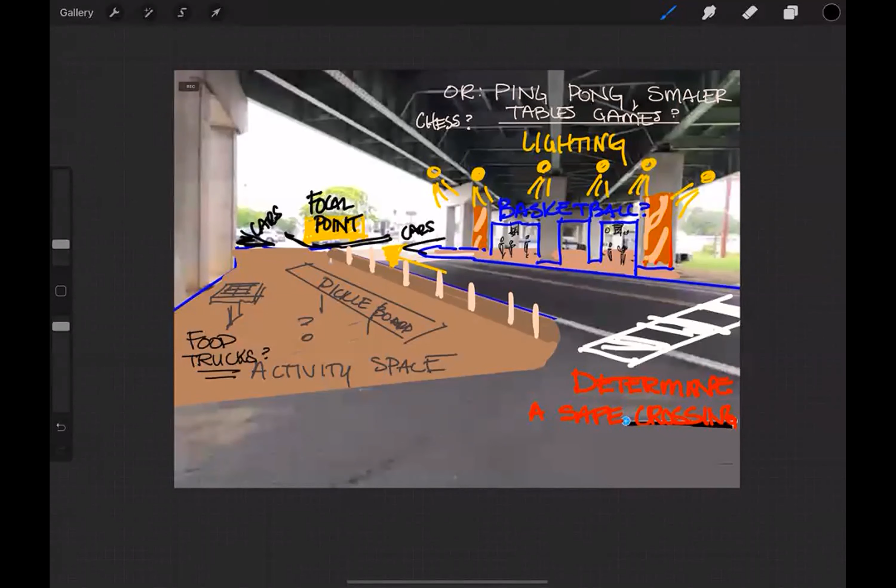It would also promote the whole pedestrian corridor and strengthen that. So if there's not enough parking, I feel like you don't necessarily have to continue adding more parking, you just make the corridor more inviting to pedestrians. Absolutely spot on.

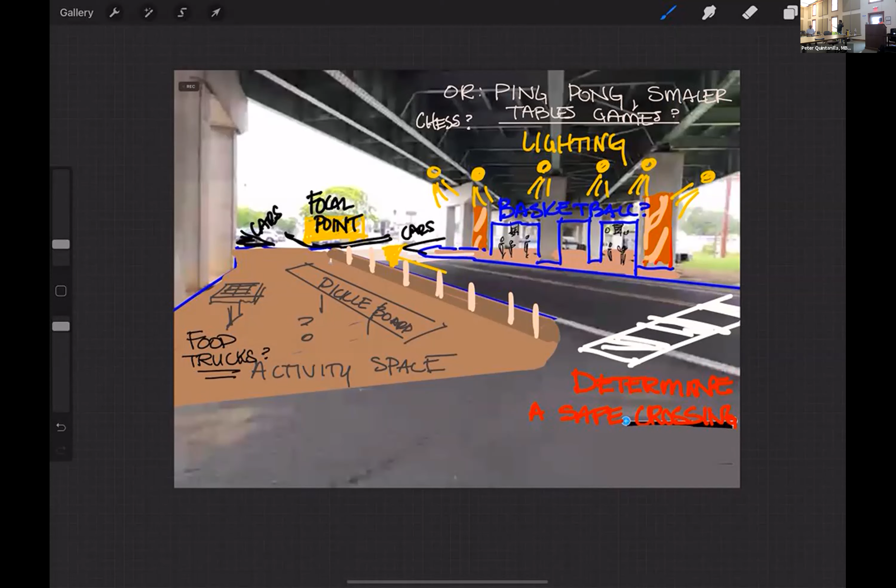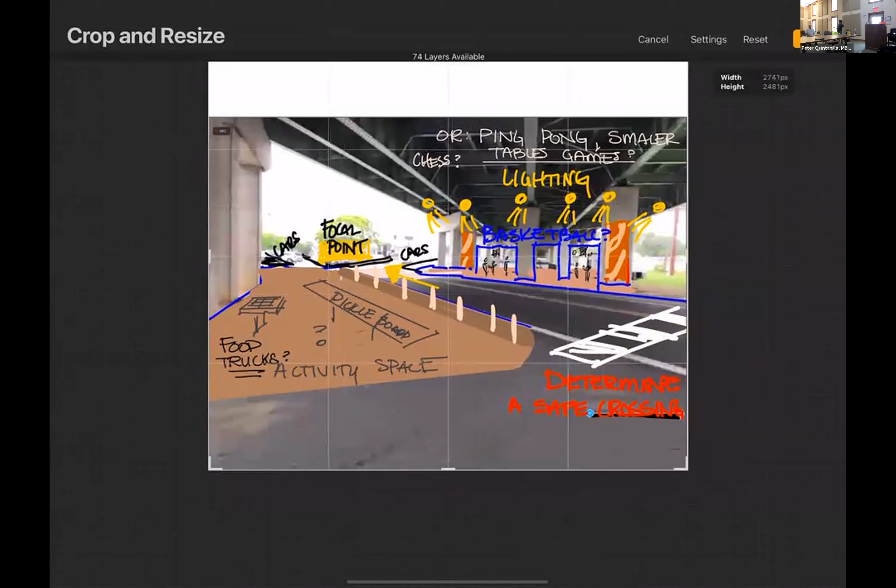Here's one opportunity: one of the areas we looked at, we were like, oh my God, that looks like an eyesore, right? It's like the worst thing of the whole area, except for the closed down businesses, which there aren't many of, but this is a real bad eyesore. But in reality, now we're flipping it on its head and making it almost like the center of the community, because now it has so many different uses. You can imagine a playing field and all that, plus the food trucks. That would be a great place for people to come and visit.

Don't think you're going to get Flinchy to cede land to public use for competing food trucks next to his restaurant. Yes, does Flinchy's own that area across there now, John?

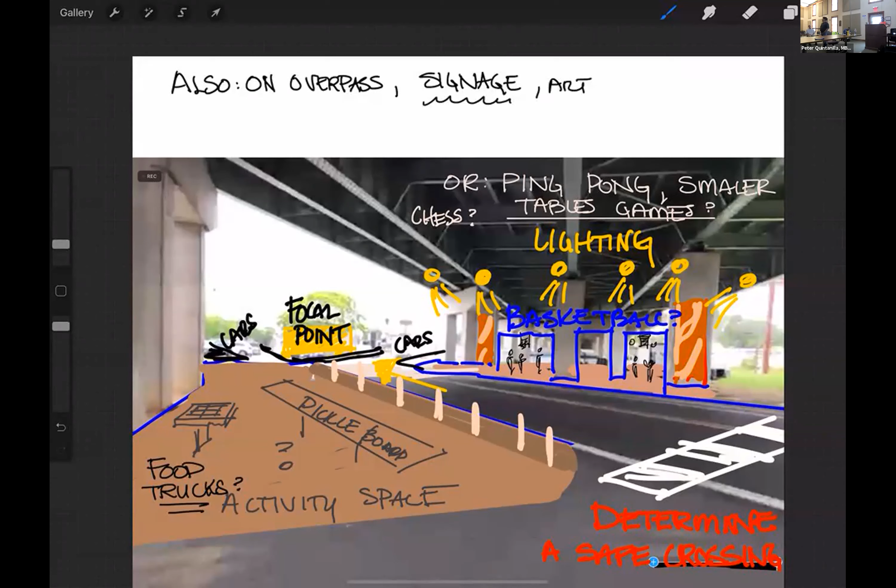They own what was township property on the north side toward the old railroad tracks. The view you're looking at toward Highland Gardens and Highland Park, that's owned by the various owners on that side of the road.

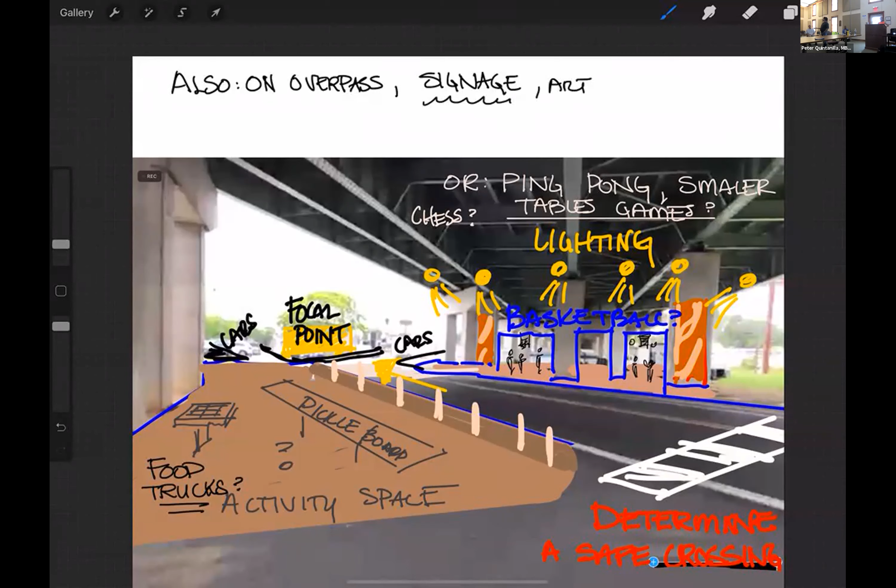There's also a lot of times that, if they have, for example, burgers, then maybe somebody has tacos, and all of a sudden it's a better relationship because you have more offering, meaning more families will be able to come because kids may not like tacos and the other one's the burgers. That's exactly what happened in my family. Having more offering actually brings more people. But you're completely correct, most businesses are afraid - they're like, I don't want any competition, but yeah.

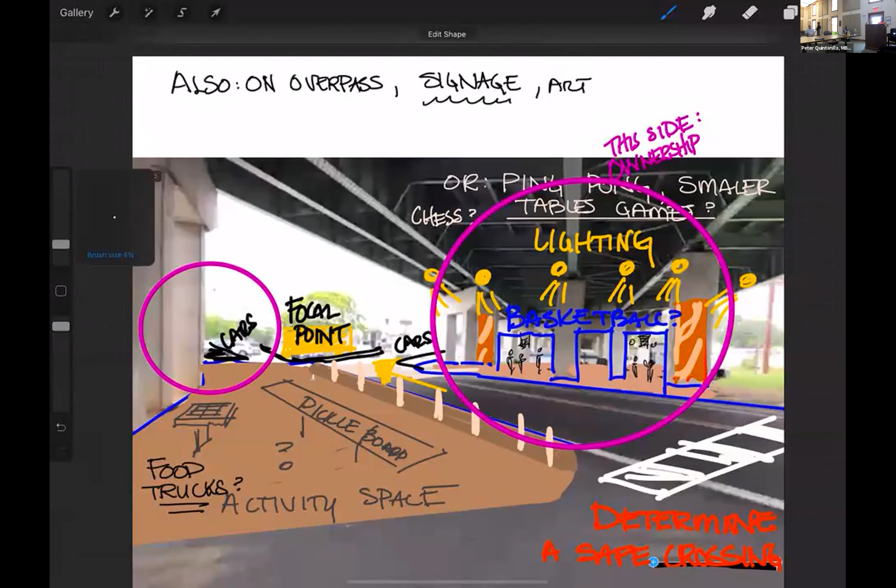I don't know. I do know he makes rental income from boats, trailers, and RVs under the viaduct.

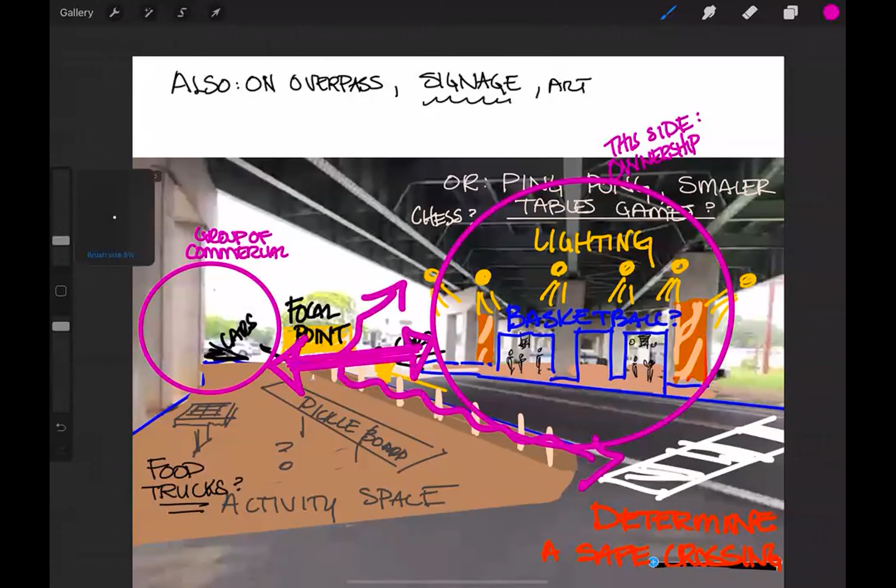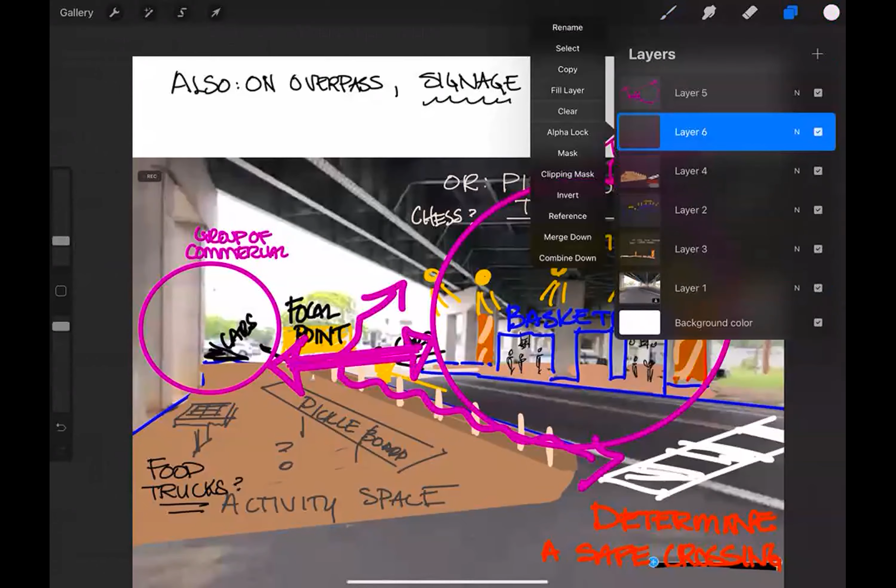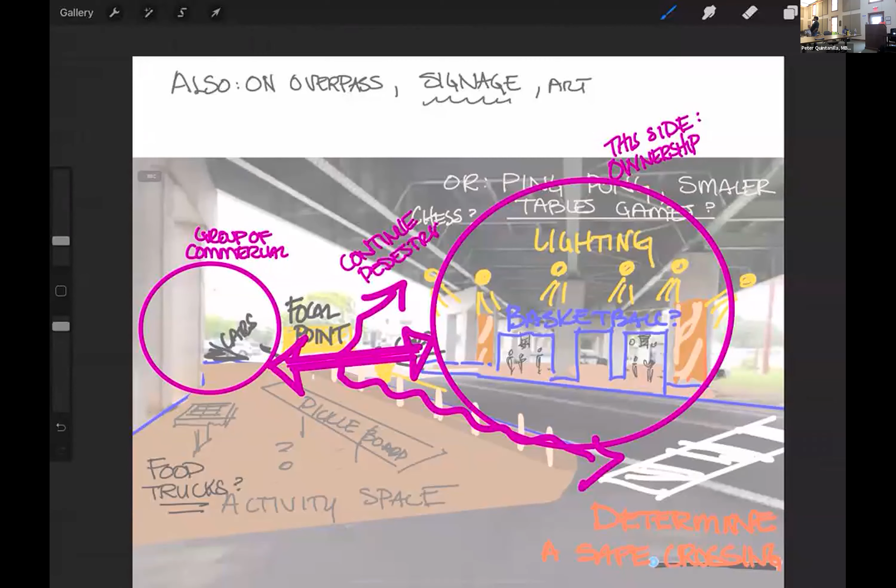So the other thing I would suggest, if we end up getting some sort of use out of this underpass, would be pedestrian access coming from the township building past Brewhouse and all the way. That corridor between Brewhouse and Flinchy's really isn't too walkable, and I think if we get use out of this space, going with the continuity and connectivity theme, we could connect that area through the industrial use there and back into this kind of mixed use area. You definitely want to connect with Highland Park and Highland Estates because those would be your walkable customers to a play area and a restaurant. Absolutely, indeed, yeah - that's a great point, John.

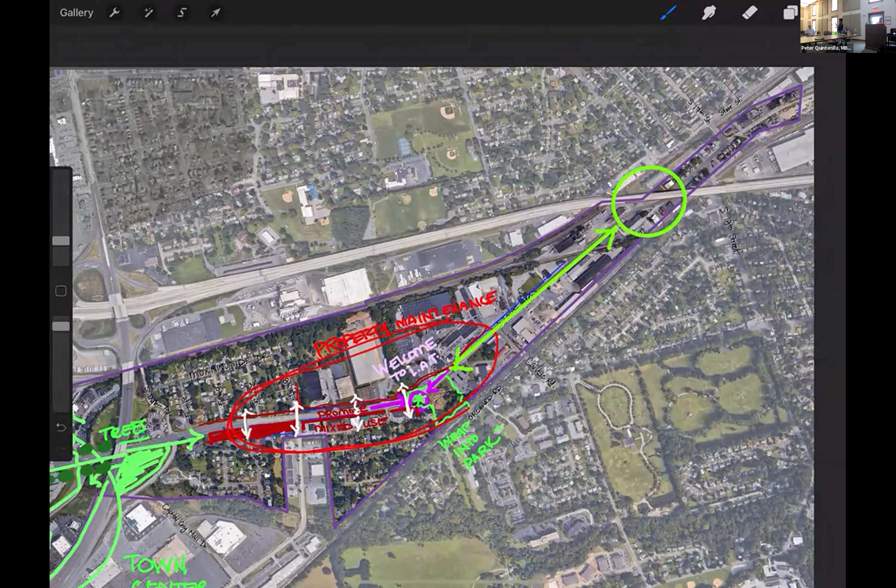And ultimately what ends up happening too is whenever you start having these little special moments, some of those bigger buildings that at the moment are like factories and stuff, they end up dying off and things are moved somewhere else. But then those buildings are the ones that get retrofitted into the really cool New York style lofts and all that, which brings a whole different set of issues. But you can see how that's what ends up driving the change over time for a place like this.

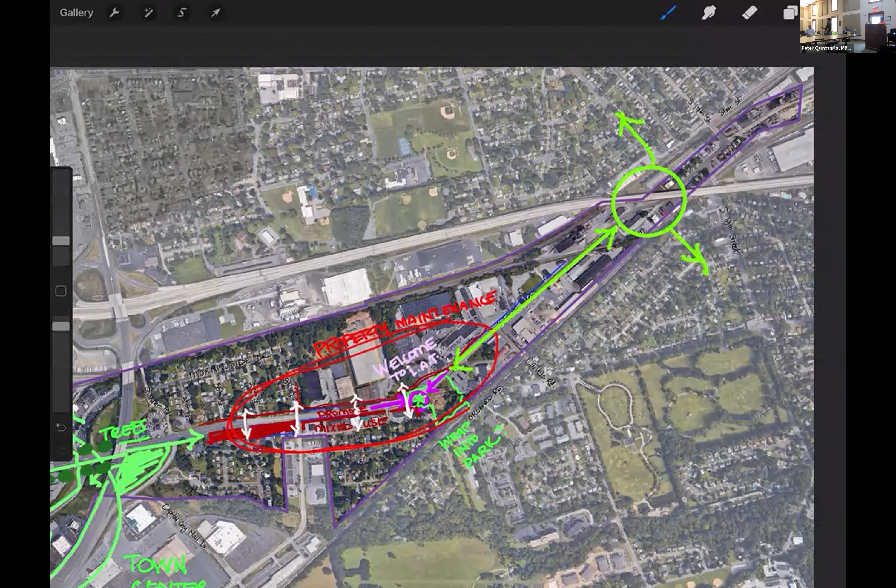A lot of the solution, aside from what we can do on the underpass - you could basically just go over there and put asphalt, hang a couple of poles and put some string lights, and you could call it for food trucks, you could call it for basketball, wherever you want, so you could make it a mixed use space. That part is actually quite simple, except we're talking to PennDOT. Aside from that piece, everything else is something that will take time. But that's why we're looking holistically at a 10, 15 years down the road.

Some of these public improvements could lead to private investment. Sometimes the private sector needs to see where the public sector's investments are coming in, and then they see an opportunity like, oh, I now have a reason to invest into my property. Exactly.

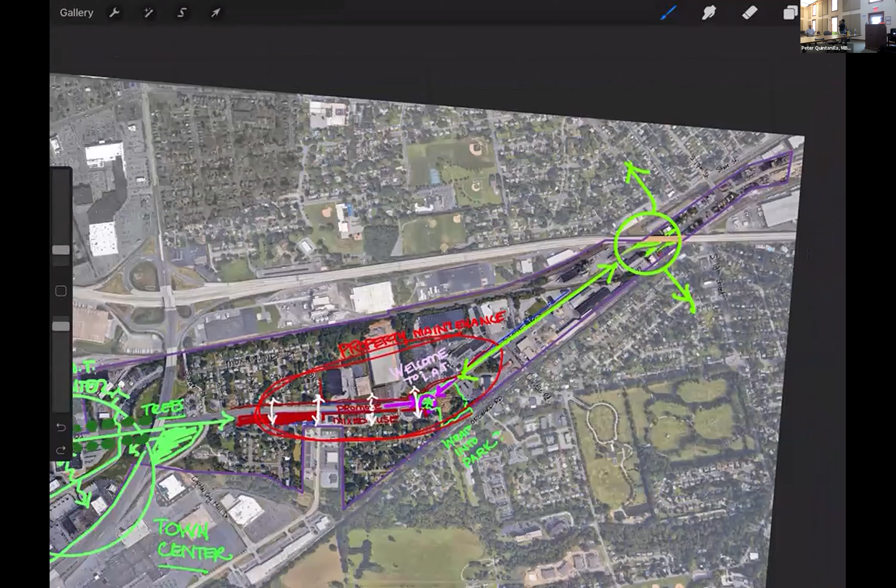I forgot, somebody mentioned earlier when I was in the car and I couldn't unmute myself - somebody mentioned being able to talk to the businesses, so that this is actually a joint effort between the business and the municipality. You're spot on. What we have done sometimes is that 5 or 10% - we say, okay, the municipality is going to do 5%, you business owner do an extra 5%. That's already 10% of improvement, which I start to see a difference. And that 5% for a business could actually be something as small as a planter outside, or a bench, or just cleaning and brushing the sidewalk - those improvements could be very small for them. Municipality puts in the other 5% and it makes a huge difference.

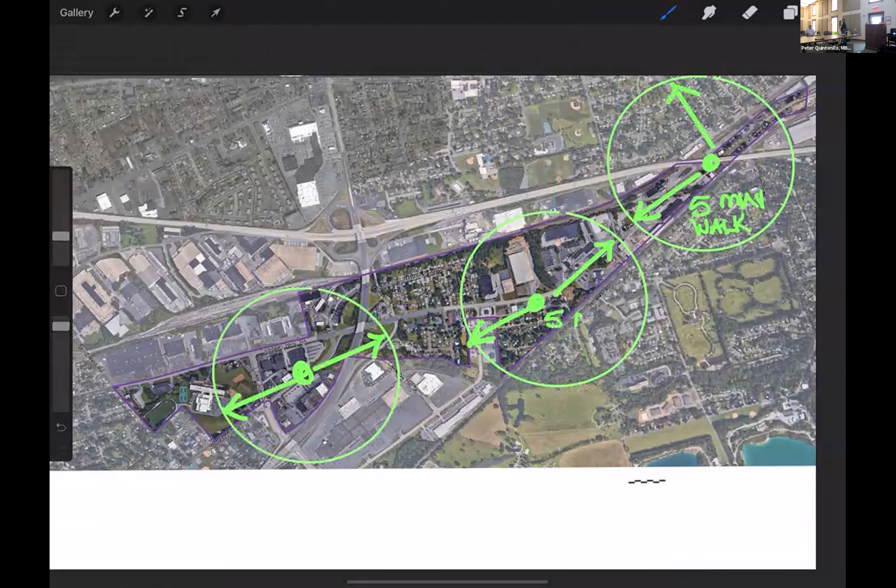Has the township ever thought about a business improvement district, where you take that type of special district and it has the collective ownership of those properties? Haven't talked to anyone about it, but it's definitely something to consider. I know in Gettysburg we helped put one in for Lower Avenue - they needed it, they were a struggling group of enterprises after the visitor center went to Cumberland Township. Harrisburg knows - yep, they have that too, downtown Harrisburg. So it's something to potentially think about, because you have to have maintenance improvements. Just throwing it out there as something to contemplate. It's not something we're right now advocating, because we don't have a basis other than there needs to be some type of revenue to help with this.

Tell me about the anomaly, because Peter mentioned the kind of quaint homes - that's the only part of the village of White Hill that's left. You had a train station, rows of duplexes and so forth, and I think L.B. Smith gobbled a lot of those up for their factory and parking lots. So that's what's left of it - it's a real anomaly, because it seems totally out of place.

So it's like an oasis of houses from a bygone era that aren't being improved, but they're not being converted either. How would you deal with an anomaly like that? You don't want to just tear them all down. Right now, are they all rental units? I don't think so. They're all owner occupied? It's a mix.

Yeah, it comes down to property maintenance, code enforcement, et cetera. Who maintains the sidewalk? The property owners are responsible for maintaining their respective portion, so you end up with these little chunks of sidewalk with separate maintenance responsibility. Maybe that's where the township starts to work with the property owners, and like Peter said, we'll help with improvements to the sidewalk, but we need to see some property maintenance occur. Maybe there are incentives for facade treatment. So it really comes down to that property maintenance issue.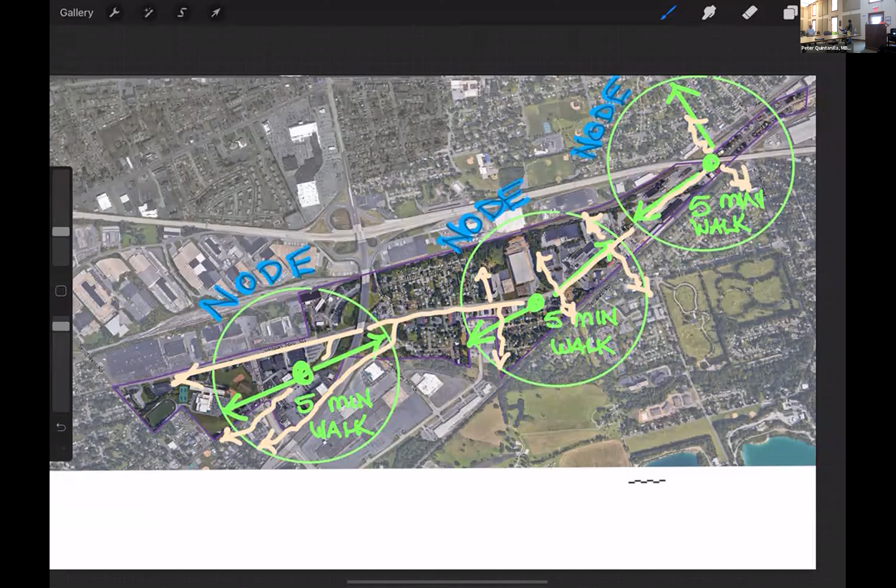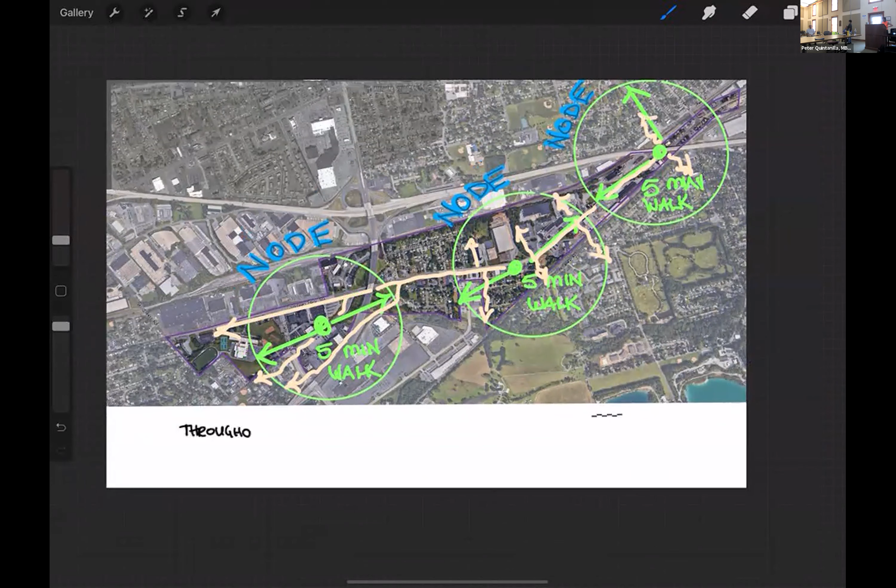Plus, just next door, I think we recognized during our field tour that body shop, or detailer, made some improvements there. I think we heard there were some issues going on with property maintenance or code enforcement, so some improvements were made. We could probably talk through some ideas, but it'd be good to understand more about what's going on. That's a unique little spot, kind of quaint. If it were improved, and next to that park, the idea could work. Transmission shop.

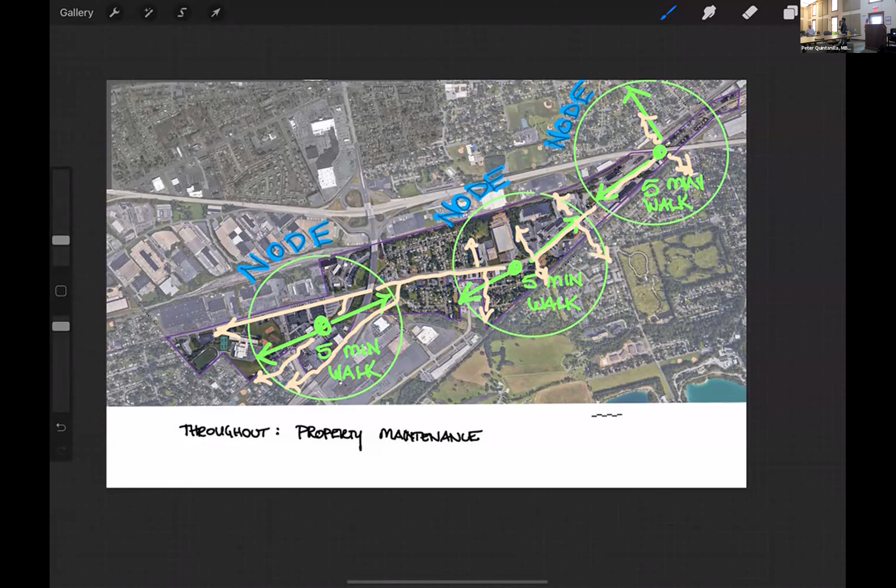Can they have that many cars parked there? You're talking Emery Transmission, which is almost in Lemoyne. They're jam-packed, they might have some cars in the right of way. It's on the other side of 17th Street.

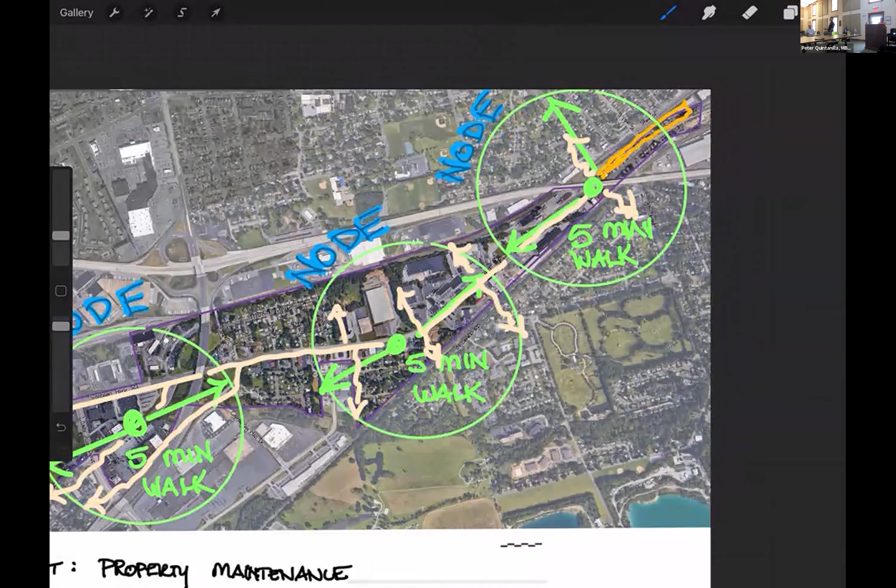Are we going to go bit by bit tomorrow? Yes. Okay, so that'd be more something to detail, because the Lemoyne gateway to Lower Allen is extremely industrial. You have Kessler's, and the Hempt Brothers old concrete batch plant that's now a bullpen for construction equipment. There's not a lot you can do with that unless you change the uses.

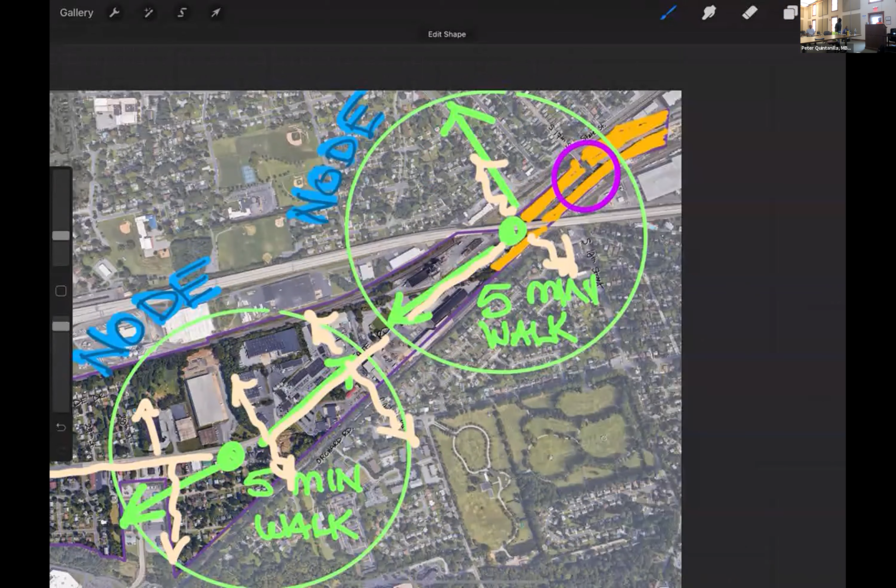But as you approach and cross Hummel Avenue, crosses 17th and 18th, Hempt Brothers had that little corner with their billboard sign, they were just sold. Maybe there's an opportunity to get a gateway there. Yeah, we thought about that. Boy, that would be great, because at least the Highland Garland corner, that's a great corner, it's like a little village. It used to be a village, so you still have that village character that could potentially be revived, and if you got some reinvestment in some of those properties, that would be a great potential.

So the last time we walked around here, I got a call from Leanne, one of our colleagues, and she said come have coffee with me. I went up to Camp Hill and looked at the buildings there, and I'm like, oh my God, that's what these guys can become. Living up on top and then ground floor retail, which means making some conversion, but that's where, as I said earlier, when you create a built environment that lends itself to more commercial type and walkability, those ground floors become very, very expensive. Then the owner would automatically want to get paid a lot more money because it could be a nice little cute boutique shop at the historical heart of the community. So it's also thinking about the architecture, because those are quite unique and very nice.

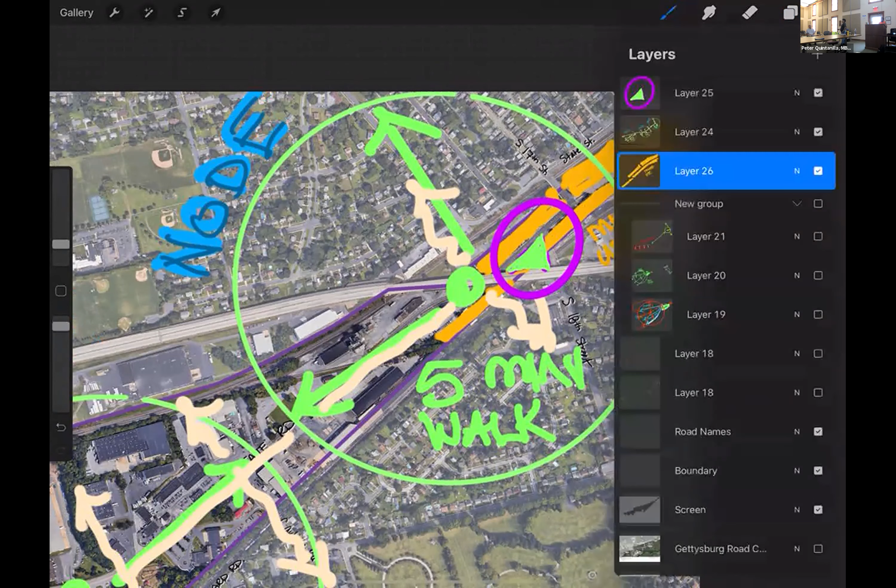But again, just Camp Hill right around the street, there's blocks and blocks of them. If you go east into Lemoyne on the avenue, it's the traditional 1920s big porch twin duplex dwellings. Yeah, there's beautiful, hundreds of them down there. That's the little remnant that we have. They're beautiful. Is the glass shop coming back? Coming eventually.

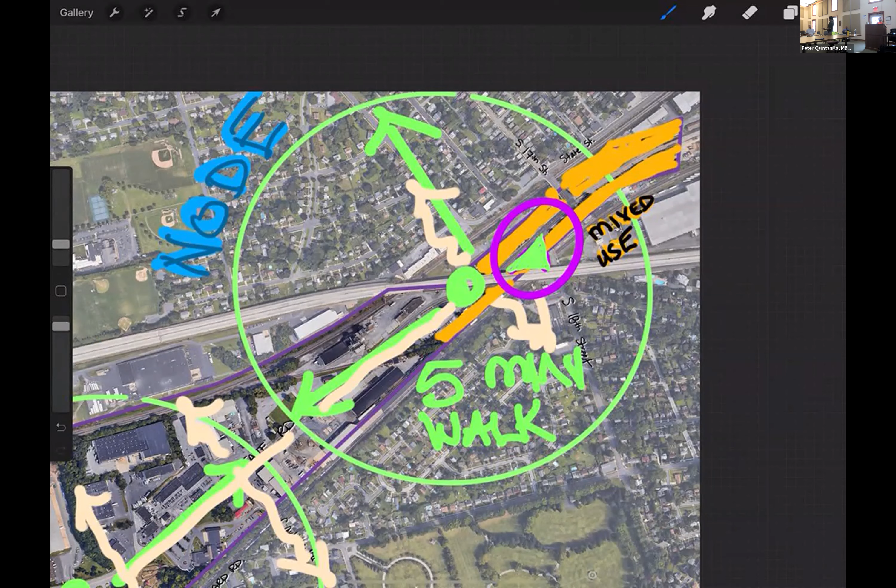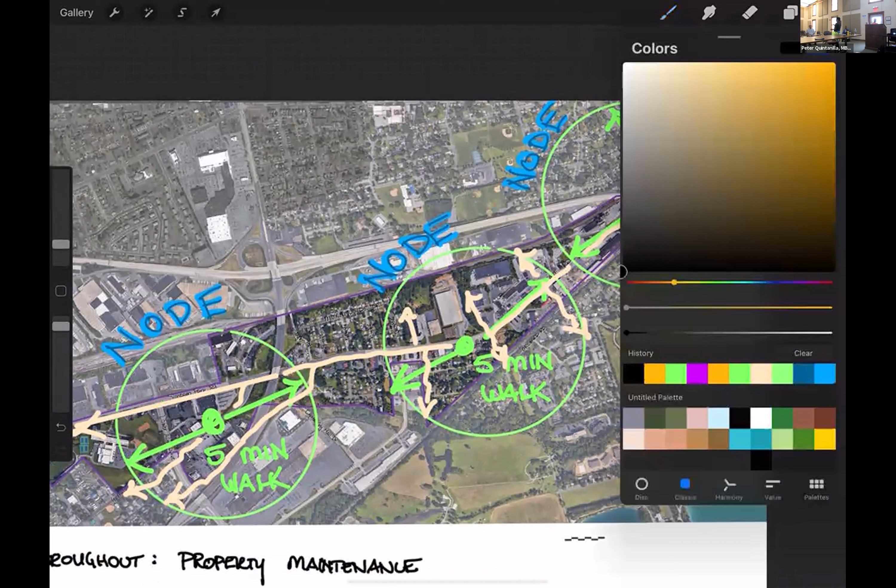I'll say that I think it's fantastic. All the little bones you have in the community are fantastic. It's just a matter of having a real plan of how to connect them and sticking to one vision, which is we're going to go for bicycling, pedestrian, and families. You have a lot to offer.

So, we are wrapping up here, and we can take a few more comments. We wanted to show all the areas we looked at today and some of the things we talked about, really starting to identify different areas of activity. What I've shown here is a 5-minute walk from a couple of these different nodes, just to get a sense of scale and how they connect.

Tomorrow we'll dive into more detail because it's a long corridor. We're going to look at some of these areas one by one. We have 3 sessions throughout the day, and we'll look at roughly the west, the central, and the eastern portion of the site. Throughout all of those, we want to remember the things we talked about today and how they connect, to get a sense of how far apart and how close these are to each other.

So those green circles show you roughly a 5-minute walking radius around a central point. You can think about how some of these might develop into different nodes of activity, different types of uses, and different reasons why people go and visit those places.

And everybody understands what the 5-minute walk, the magic of the 5-minute walk, is, right? It's like this new urbanist concept where people actually walk 5 minutes as long as there's something cool at the other end. So that's kind of like a little neighborhood node.

So that's what she keeps writing - she wrote 'node' in blue. Once you create a node, there's something in the middle of it, and then within 5 minutes there's something else that's also really cool, so people walk those 5 minutes. But that also means you're not going to put people to walk on a sidewalk next to 60 mile per hour cars or a parking lot. So you also have to create the conditions that make that linkage correct. But in theory, you could have a lot of people walking up and down the entire corridor as long as you create these nodes.

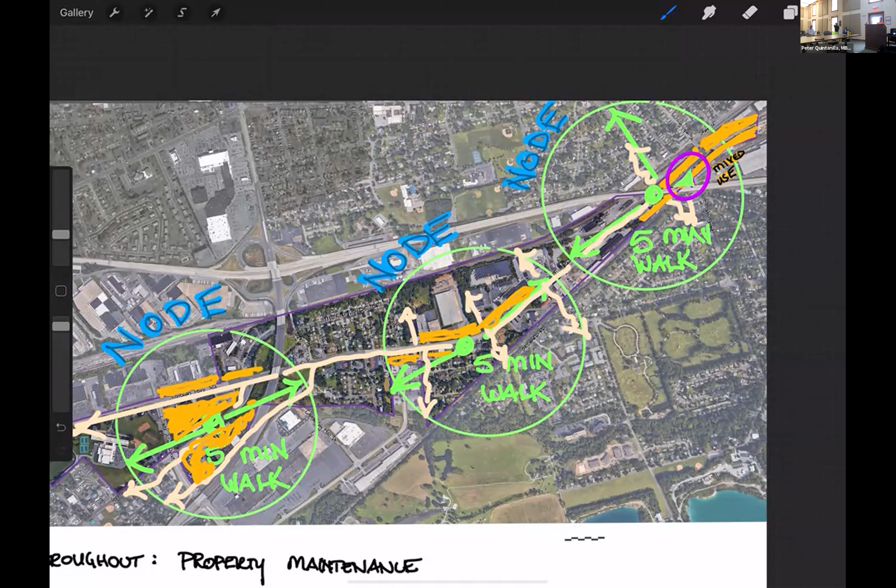Now, the first half hour tomorrow morning, is that just a recap of what we did today?

That's a good question. Tomorrow morning we have a session starting at 9, which is basically recapping what we did today, very briefly. You're all welcome to join us at 9 or at 9:30, since it's optional. We knew not everyone would be able to join today, and we hope some people may hear about this and decide to join tomorrow even if they hadn't initially planned on it. That 9 to 9:30 session is just background information to get new participants situated. It won't be this long or in-depth, but we wanted people who couldn't join today to still have a short introduction. The design sessions will begin at 9:30.

That's also a good question. As Troy mentioned earlier, there's no requirement that anyone stay throughout. We hope people will join when and for whatever length of time they can. If you can't join the entire time, that's fine. Each design session will be different because we'll be looking at each of the 3 areas.